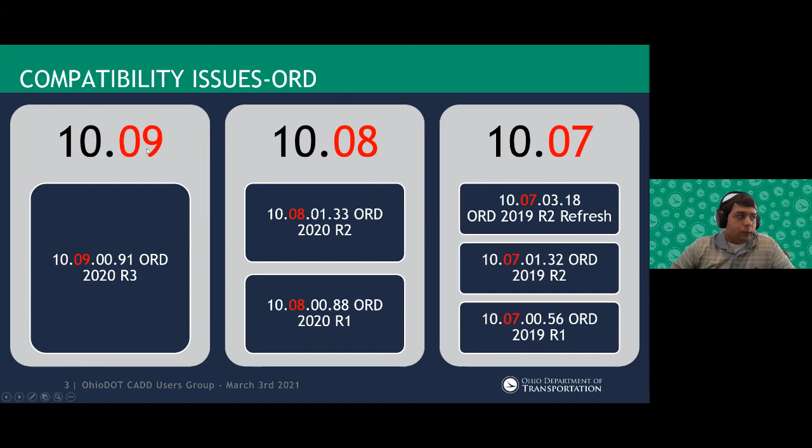I kind of wish I would have used 10.9, 10.8 rather than the name, but a couple years ago, Bentley was pushing this name hard when I wrote this, and they said this would be the easiest way for everyone to understand things. But I think now we see that the version number is really what we care about the most. So there's a little reasoning why I didn't use the numbering.

So when you set a version control here, if we release anything in a newer version than that, you won't get that update. And that's what keeps it compatible with whatever you set there. So just keep an eye out for that. We have not released anything past 2019 release 1 yet. That's why you won't see one in there yet. But hopefully that is clear to everyone. If you guys have any questions, feel free to reach out.

Another thing I wanted to talk about as we're talking about compatibility issues is the tech preview that was added into 2020 release 3 of ORD. It's the downgrade civil model option. I know you guys can't click on these links, but when we send the PDF out, these are links to Bentley's OpenRoads wiki page. So they have videos on these, but I also have the next slide. I'm going to walk through the same thing these videos go over.

All right, so let me just play this video and we can see what the downgrade civil model can do. So I'm just in ORD, I'm in the latest update. I'm going to go back to the backstage and there's now a downgrade civil model option. So when you click that, you're going to get the tech preview thing. So fair warning, it is a technology preview. So you hit OK.

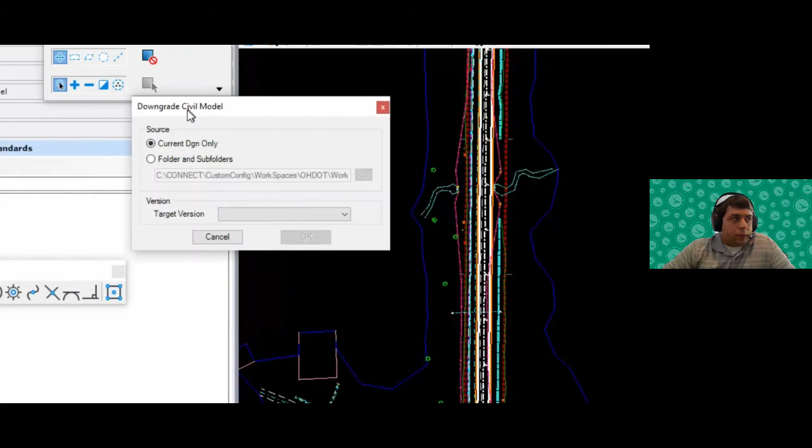And it will open up this little dialog. And you have two options. You can just downgrade your current DGN, or you can choose folder and subfolders. So you can downgrade a whole set of files within a folder you select. So first I'll just do the current file.

So you just pick what target you want to downgrade to. So, maybe I want to go back to 2020 release 2. So I'll hit OK. And then it will say, okay, where do you want to put this file that we're downgrading, right? So I will just choose the location. I believe I choose the scratch folder, or the 999 scratch folder. So I'm just making a new folder here, calling it downgrade.

And then I will go into here, hit open, and then I will get a little processing form here, and it'll go through and kind of tell you that it downgraded the file. So there, and downgraded, and then what I'm going to do now is just show you that it actually worked. So if I close this and I go and try to open that file I just downgraded,

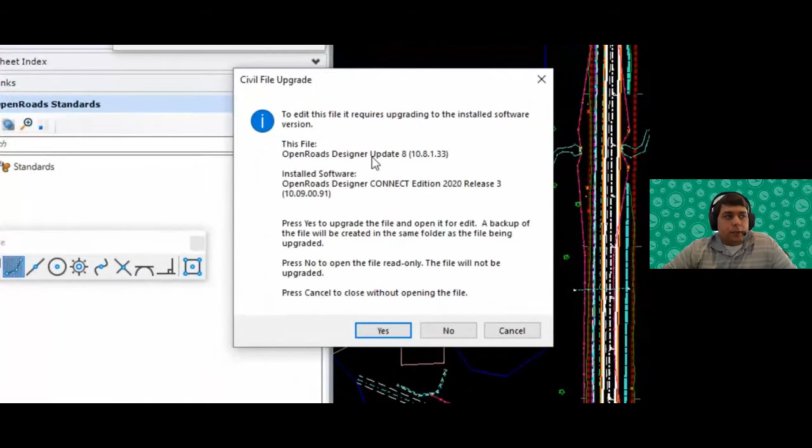we will see that I will get prompted to upgrade to the newest release. So that's basically telling you that that file got downgraded to update 8. So if you open it, it will upgrade it to the latest one, the one that you have installed.

So another thing I want to show here is the remove civil model option. So what this will do will actually just remove the civil schema completely from the file. So I'm going to select a folder this time. So I'll go to engineering, I'll just pick a sheets folder, but it's going to work on any file. It basically just strips the civil model completely from the file, so that you can open it with any MicroStation product, really. So I'm going to throw that into a different folder there.

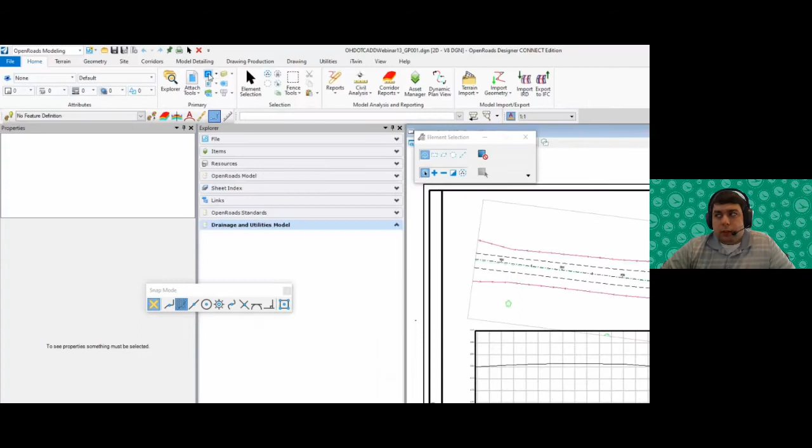I'll let it go through. There's 2 files there. All right, so it's done. So now I do want to show you when you remove the civil model, one of the things that it does do specifically for your profiles. So if I go and open that plan and profile sheet, take a look at the drawing model for my profile, you'll see that it has flattened it to just graphics.

That's because that ability to see that profile, you need a civil schema, right? You need the ORD to see that. So you notice it's a cell. So I'm just going to come here and drop that cell, and then I'll drop this line again here, and you'll see that I can select it, and all the vertexes will show up there.

So that's one of the things that it does do. It only does that for profiles. Cross sections, it's still a reference since it's just a slice of your 3D model. So didn't really need the civil side.

So another thing you can do is you can actually open Civil File Manager and perform pretty much the same thing. This used to be called Version Checker. So with this release, they changed the name of it to Civil File Manager. And so in here, I can open up file, folder, subfolders, so pretty similar to the other way. So let me just select a file here.

I did notice that right now in this tech preview, this is not integrated with ProjectWise. If you notice, it did not give me the ability to select a ProjectWise location there. I'm assuming that will be an update that will come out. So I'm just going to pick a folder here.

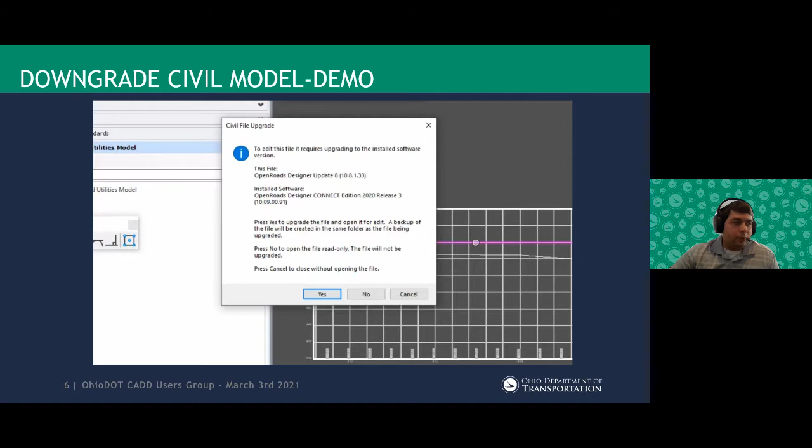Okay, let's see here. Someone asked about a list of defects. We do have a bunch of defects. I guess we can talk about letting the bigger ones be known. Some of them are enhancements, some are defects, some they're working on. We are working with Bentley, and they're working on a lot of stuff. So we can take a look at our list and see what we can put out there.

Okay, so a lot of good questions. I like this. I feel like if we were live in person, most of you might not have asked those questions, right? So there are some benefits to doing this virtually.

All right, moving on. Hopefully the downgrade civil model, which I think is a pretty cool feature, might solve some issues you might be running into when working with subs. But honestly, when you start a project, you really need to get everyone on the same page, the same version, so you don't run into those kinds of problems.

The next topic, which has been a very frustrating problem for me, and maybe you've run into it, is the refresh item master problem. I believe this started back in May. If anyone knows what I'm talking about, they've probably seen this frustrating dialogue. Honestly, I don't know what happened. The refresh item master has been there since 2015.

That button has worked since 2015, and all of a sudden it's asking externals for credentials, when you can go to the same location it points to on the SharePoint file and download it no problem. Either some Windows update, some Office update, maybe some update on our end on the SharePoint side, but our IT has sworn to me they did not change anything in permissions. So I couldn't get to the bottom of what caused it, because it actually is working. If you're inside ODOT, we don't get this message. This affects the GenSum file and our item master Excel add-in.

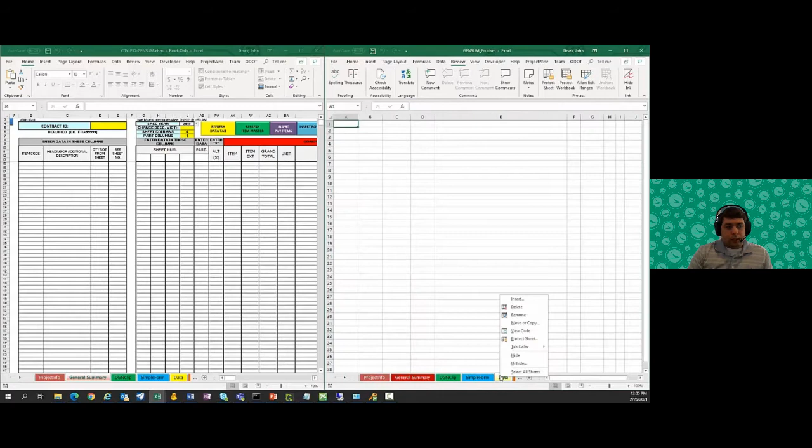I'm going to right click. I'm going to say unhide. And I want to unhide the query item 2 sheet. Okay, so that's actually the copy of the item master that gets updated, if you guys are wondering. I'm going to unprotect it. So go up to the top, review, unprotect the sheet. There's no password, it's just protected. Okay, so that's what we want to update.

So now we're going to go over to our GenSum file that's updated from the FTP site. I'm going to do the same thing. I'm going to come over, right click, unhide, unhide the query item 2. So in here, all I'm going to do is I'm going to select all of the lines. So I'll just select A2, hold down the shift key, hit over to get to the G column, and then hold down shift and control key and hit down, and that will select all of the rows.

I will then copy it, and I'll come over to the file I want to update, click in cell A2, and I will paste. Okay. So after you paste it, you should then have the update. If I go down to the bottom, so just hit control down, takes me to the last row, control down on the other side there. I'm at both of them at the same time. Most likely got all the updates then, right?

I'll protect that sheet again. If you don't, it's not a big deal. I'll hide that sheet so we don't see it. And now your GenSum file will be updated. Okay, so we'll hit save. And so that is the manual process. I know that's not ideal. I get that, but

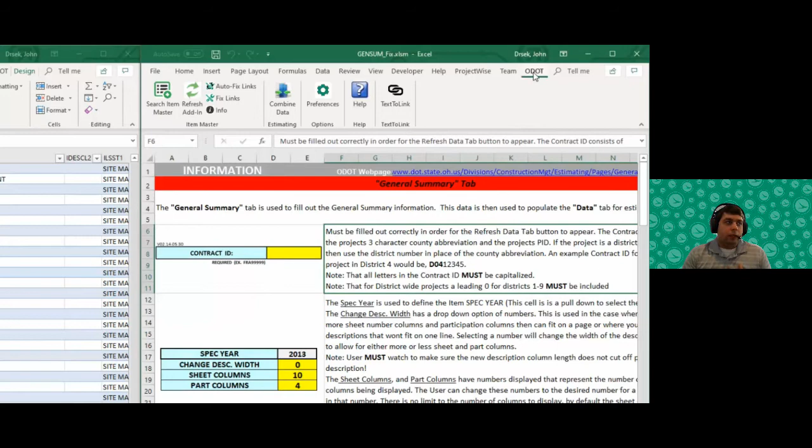So the add-in file, if you have the ODOT tab at the top, that's the add-in. So you're most likely at the same problem. It won't let you refresh the add-in. So this is just a file that you're actually just configured to inside of Excel. So all we have to do is just replace this file.

So if you're wondering where that file is, if you go to the backstage and hit options and then the add-ins section or tab, at the bottom you see the active application add-ins. There's the item master add-in, and it's going to tell you the location of that file, right? So this one is on my X drive here. So wherever that is, that's where you need to replace the add-in so that it gets updated.

So most of the time it should be inside your standards. So if you guys are on the network, then you probably all are configured to the same add-in, but you just literally come here and download that file and replace it. So that is the manual method for updating the item master in the add-in as well as the general summary sheet. So this video will probably be useful if you guys run into that. I know many of you already have ran into it.

Again, I can't figure out what happened. So the solution, this is going to be an active virtual meeting, right, or event. So I am going to post this link in here to this form, and I want everyone to fill out the form, and I'm going to walk you guys through it, and we can just see if our solution is fixed.

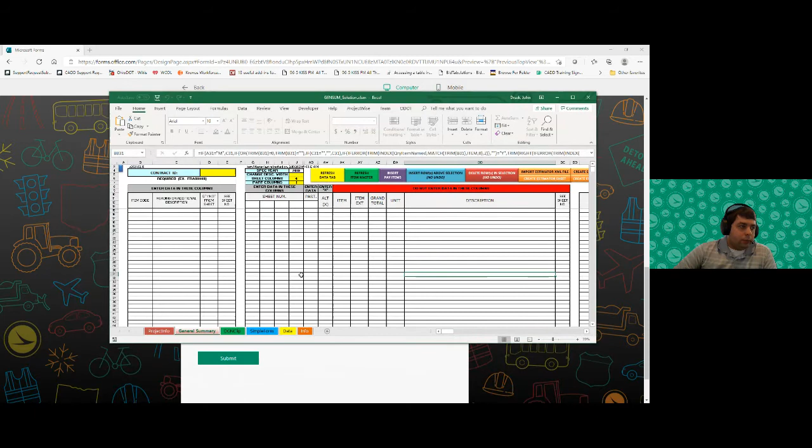All right, so it's opened up for me. I'll bring it over here. I'm in the solution file now. I come to my general summary tab, hit this green refresh item master, and then hit yes. And let this one update. And I got successfully updated. So I hit OK. So I knew that was going to work for me.

So externals, hopefully you guys are doing this right now. So I'm going to submit this. And it says, thanks, submitted. So let me pull up the results here and see what we're looking at. I'll give you guys some time to actually fill it out here.

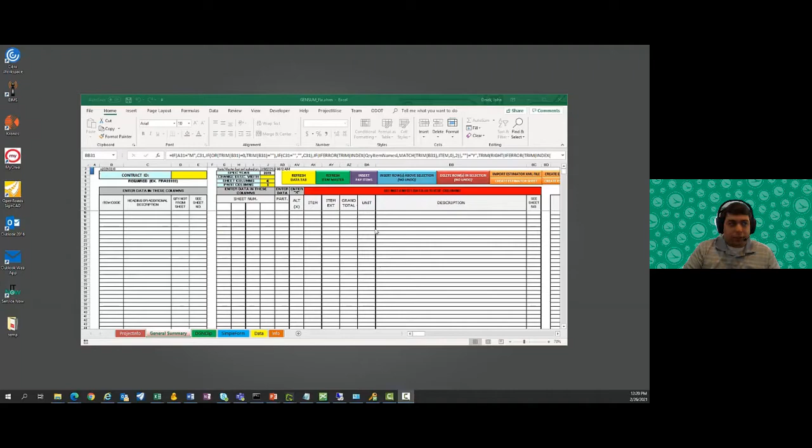Okay, try it again. All right, so I'm in this GenSum file, and I really wanted to clear up how the linking is working. So in the GenSum file, as you just saw, there's a copy of the item master inside this file. So it doesn't link outside, doesn't get the item master from SharePoint or from the add-in. It's directly in here, and that's why there's a refresh button in here. You're refreshing that copy of the item master.

And technically, there's two copies because I support two different spec years. So you see that spec year drop down. It says 2019 right now. When you choose the different spec year, the links are all switched to use that item master for that specific spec year. Okay, so I think that's pretty clear to everyone. It's all contained within this file, right?

Man, I talk too fast on my videos. So if we move on to talk about the item master add-in itself, so yeah, there, let me get the video caught up here.

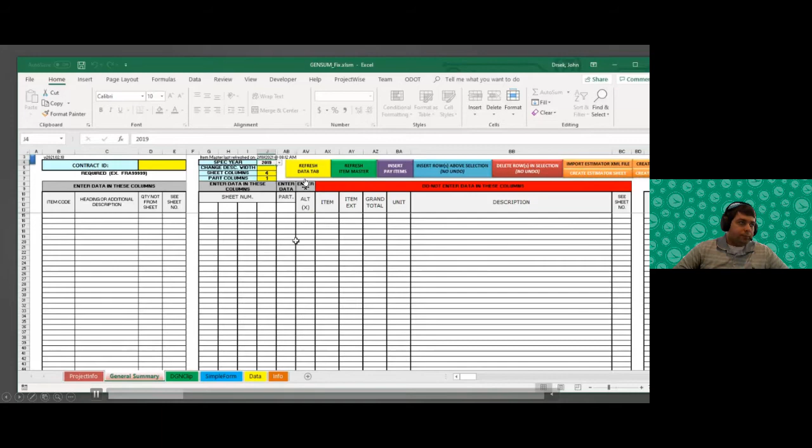So there's the drop down for the different spec years. So that means that technically there's two copies of the item master in this file, one for each spec year. Let me jump forward a little bit.

Okay, here we go. So the add-in itself, the thing you got to remember about the add-in is it gets loaded no matter what file is open. So it is a standalone thing. You see it when you open any file, but look, I have a blank file open. I still have that tab. So you got to keep that as a reminder that it is completely separate from all the other files you have open, right?

And so this add-in also has a copy of the item master in it as well. And the refresh add-in button inside the ribbon is actually updating the copy of the item master inside this add-in. So, which spec year you're using, that's in the preferences. So if I open up the preferences, you have the option to set it to 2016, 2019.

So keep in mind, this has nothing to do with what file you're in, right? This always gets loaded. It's an add-in. So when you hit that search item master, it's going to show you the item master for what spec year you've set to use in this add-in, right? So again, there's two different locations. We have a copy of the item master in the add-in. We have a copy of the item master in the general summary sheet, right?

So now let's take a look at the sub summary sheets that have all the formulas that pull the item master data like descriptions and stuff. You'll notice there is nowhere in this file a button to refresh the item master. That's because the sub summary sheets do not have a copy of the item master inside of them like the general summary sheet does. Why did I do that?

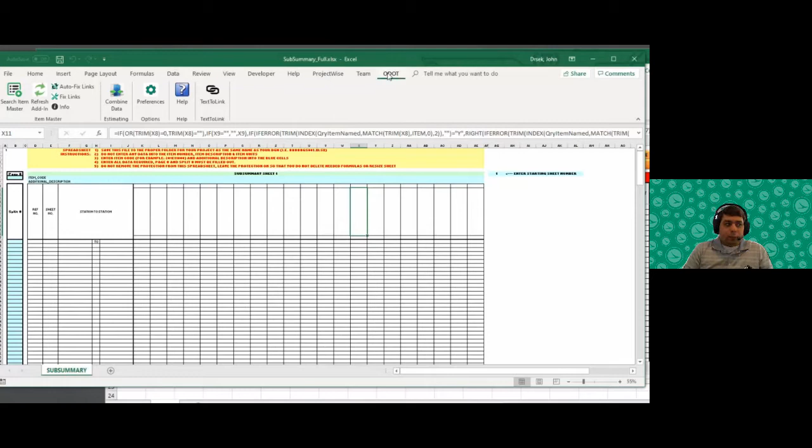It knows where the file is because you're running it from within the add-in file or from within the ribbon. So it's actually linked to the add-in. So you could also link a given spreadsheet to a specific spec year of that add-in. So if you have problems like with your items not showing up correctly, or maybe it says item doesn't exist, make sure the links are right. All you got to do is go up there and hit fix links and run it. It's very simple.

But that still has another problem. That link to the add-in, right? That add-in is getting updated over time. So if you go back to a sub-summary sheet that you maybe did 6 years ago, all the formulas that are linking to that add-in, the data might have changed over the years. So if you want to go back to an older file, you don't want those formulas and stuff to edit. You want it to stay the way it did when you submitted it, right? So linking to the add-in, you're always going to have that problem, right?

So many people don't know this, but I think a lot better way to go is instead of linking to your add-in, I give you the ability to link to a specific location. And that has been there since 2015. I just don't think people really use it. I did show it, but I didn't really showcase it, I guess. So what you can do here is you can literally just hit the little 3 dots here and go select an Excel file that has the item master in it. So a great file you could go to would be your general summary file for that project, right? So that's what I'm going to do.

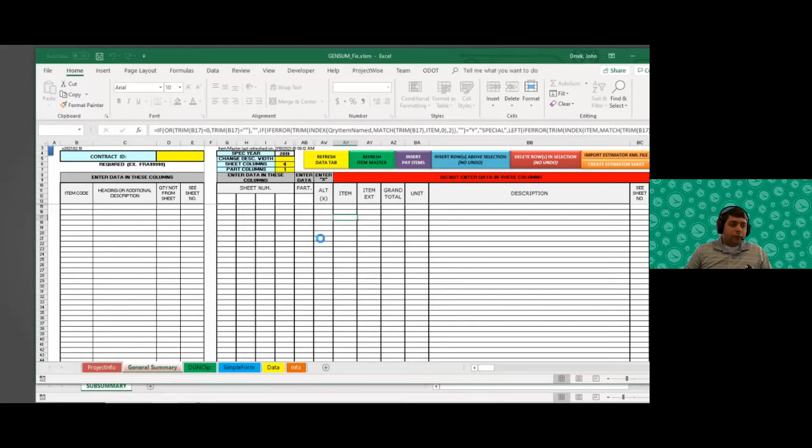I'm just going to hit the 3 little dots. I'm going to select my gen sum file. And I got an error message. That's because my gen sum file is open. You have to close it. So rather than remaking the video, I thought it'd be good to show that for that button to work. So let me do that again. I'll come in here and I will hit select location. I'll choose that gen sum file. It's going to read it.

It's going to say, okay, here are the sheets I've found inside this file that you can link to. So there's query item and query item 2. So query item is the previous spec year. Query item 2 is the current one. So when you go to the gen sum file that I showed earlier, that drop down for what spec year you want to use, the newer one is query item 2. I did that just to make updating when we go to the next spec year easier on my end.

So all you got to do is hit that, hit OK, and then you can add in your files that you want to fix your links, so most likely all the sub-summary sheets on your given project, and then hit fix links, and now all those sub-summary sheets will be linked to your general summary sheet. So whenever you update your general summary sheets, these would be using that, and that is a way you can keep the formulas from updating to the latest item master, but stick with your actual copy in your general summary sheet. So that way you can come back to the files in 6 years and you don't have to worry about the formulas showing different data as our item master is updated over time.

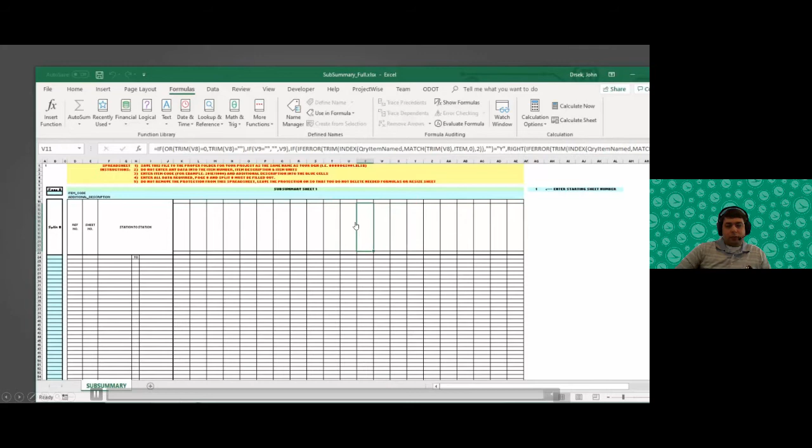So you don't have to really care about that too much. If you just use the fix links button, that'll solve most people's problems, I think. All right, so it looks like I'm about 2 minutes over on this topic, but while we're talking about the item master, I thought it would be a good time to also hopefully clarify that.

Anyone who's used the automation side of the subsummary sheet really says how much time it saves. So if you guys aren't using it, there's tons of videos out there on it, and we might do a webinar on it in the future to get people who haven't seen it or don't know how to use it started with it.

Okay, so let's see. Looks like there's no questions, which means I did an excellent job of explaining things, right?

Hopefully. So now the next topic here is placing headwalls. I don't think I'm going to take the full half hour on this, but this has been an area where we're a little lacking in our standards. We don't really have many feature definitions out there for headwalls, mainly because every individual size requires a different feature definition at this time.

If you take a look at headwalls, there are thousands of possibilities of different sizes, so for us to go through and make those would be very time consuming and probably not worth it. What we have been waiting on is for the feature definitions to be able to handle parametric cells. We're still waiting on that, but I'm done waiting. We have to provide something.

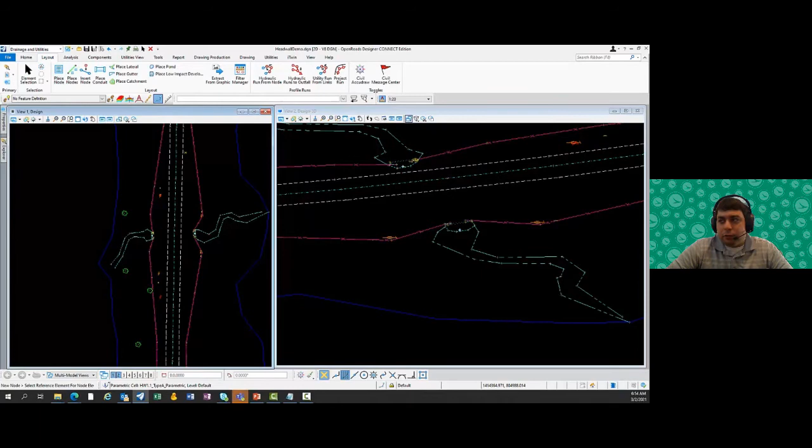All right, here we go. So we're going to the layout tab and we're going to place nodes. So again, this placing head walls isn't so much about placing nodes. I mean, I've shown that multiple times. Hopefully everyone knows how to do that, but I'll just show you the workflow here.

I'm already on the generic head wall feature definition. So that's the one you're going to want to use. There's one for proposed and existing. It puts it on a generic head wall level that you can turn off because you're most likely not going to want to see these graphics in the long run.

So I'm going to come down. I'm actually going to use the survey point, but you don't have to. So I'm keying in elevation. The rotation doesn't matter. You see there's a little X. Now, again, you're going to place this wherever you want to place it, but there's the 3D X. So it looks like a jack from like game jacks. It makes it a lot easier to snap to that center than the triangle that was there before.

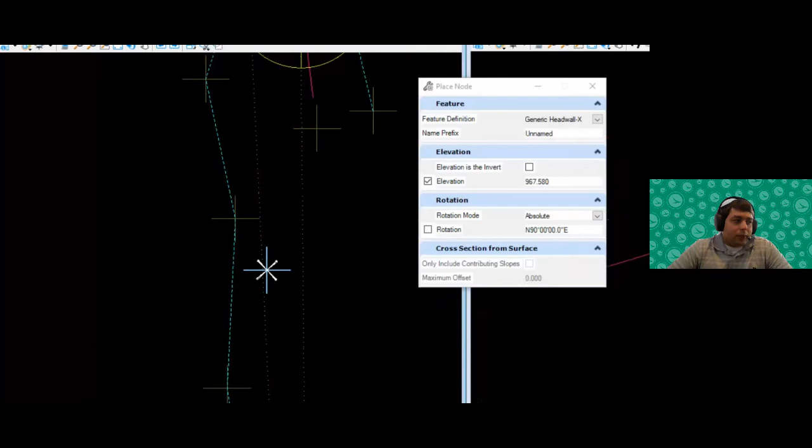Again, they're on just I think a generic head wall level, so you can turn it off to get out of your way. So I'm going to place the other side, so I'm keying in the elevation. So again, this is going to be the location that you want that head wall invert at, right? So again, if it's proposed, you might not put it right where they surveyed that point, but I'm using it just for demonstration.

Okay, so again, now you can put in a pipe. So I'm putting in a pipe. Again, it's not really what the video is about, but you need to put the nodes in to draw the pipe, right? So granted, that's a small culvert pipe. It's probably not even the right type, but it's just for demonstration.

So now, what we really want to show here is you got to go to the 3D model because this is a 3D cell that we're placing. So you do have to place it in 3D, which is where a little bit of the complication comes in because you got to know a little bit how to draw in 3D. It's not bad. So I am starting to place active cell.

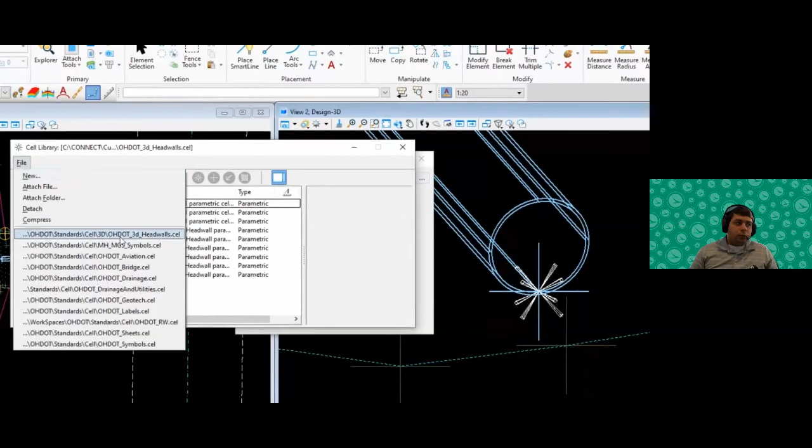So if I go and I choose the OHDOT 3D headwall cell library, in here I'm going to see all those parametric cells that I made. So I made them for headwall 1.1, type A, type B with a left angle, type B with a right angle, the half height 2.1, 2.2, and then the box culverts type A, B, and C are in there as well. So again, that's just a starting point. They're parametric cells, so you can change the variables to any custom size that you want. That's the reason why I'm showing you this, because it's kind of a workaround.

So I'm going to place the headwall 1.1 type A, and you'll notice there are variables and also variations. So on the second line, that drop down actually has variations. So that will match the standard construction drawing. So when you select a given variation, it's going to set all the variables down low to those values that you'll find in our standard construction drawings. You can very well just come in here and type in your own dimensions that you want here.

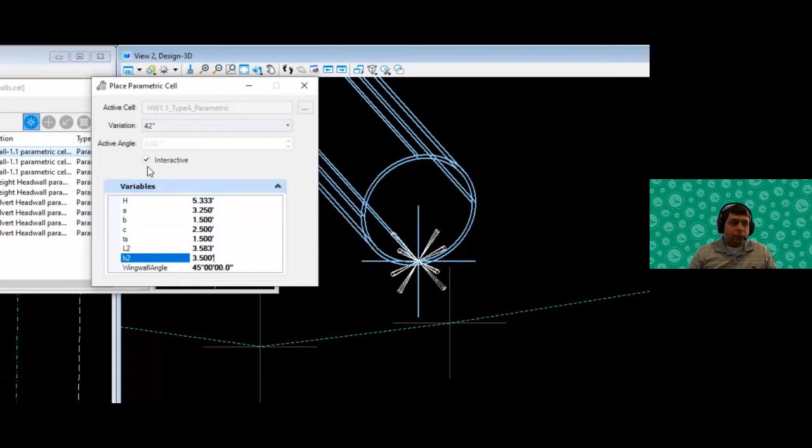Okay, so H, A, B, if you're wondering what those represent, take a look at the standard construction drawing. A and B are the footings, C is the distance to the center of the headwall parts, like half the distance of the main length. H is obviously the height, H2 is the height of the wing wall. I won't go over all of them. TS is thickness, I guess I just did. So, all right, so we're gonna place it.

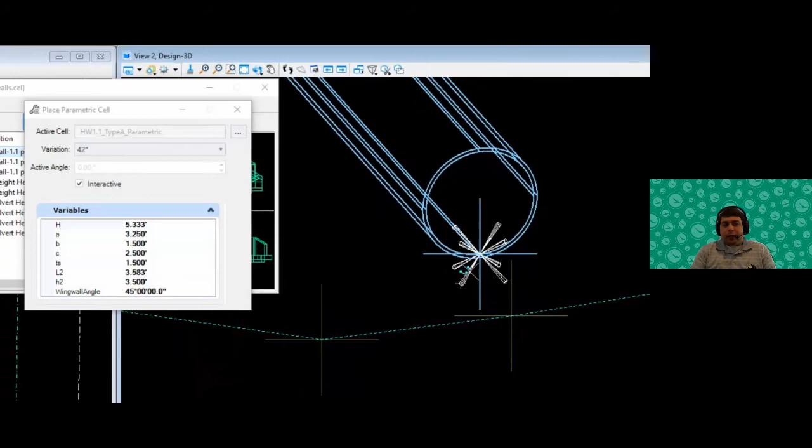So right now, when I see that, it wasn't looking right. That's because I need to turn on AccuDraw, and I need to make sure that I set my AccuDraw orientation. So I hit T for top in AccuDraw to set my 3D AccuDraw compass to be in the top plane. And then that rotates it so that it's in the top view, which is what you want. And now you're just going to click and make sure you check on interactive in the dialog so you can choose your rotation. If you don't check on interactive, it won't let you rotate it.

And the way I drew all of these is so that you could go to the other side and snap to get the rotation. So I drew it purposely so you don't have to worry about keying in an angle.

If you have a culvert alignment line or something, or just the two ends, you can easily just go click on the other side, and that'll do the rotation to match that skew of the pipe, whatever it might be. Okay. So let's take a look at another one.

So if I go to like the box culvert head wall here, you see there's more variables. That's just the way the standard construction drawing... well, I guess technically it's their data sheet. It's not really a standard construction drawing, but if you guys do this, you know what I'm talking about. So I put in a lot of variations. I was not about to put in a variation for every box span and thickness, so that's why I put the little hashtags. Just remember to fill that out. The rest really was just the heights and the skews.

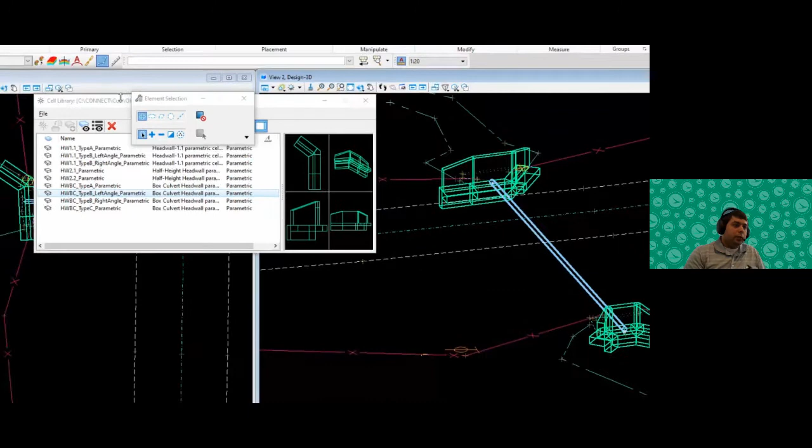So since this is a left angle type B, I'm going to do the same thing. I'm going to come over. I'm just going to place it. Again, make sure your civil AccuDraw is on and you're in the top rotation there so you get it placed correctly. And the rotation, same way, come across to the other side, click, you get your rotation. All right. So looking at top view, it looks like the rotation came in right. That's what I like to see.

And take a look at another one. So the half height are a lot simpler. They're just basically a block. But we did put in all the variations. So I had Tess do that. So thank you, Tess. We put in all those different variations. I know there was a lot of them. I won't place that one.

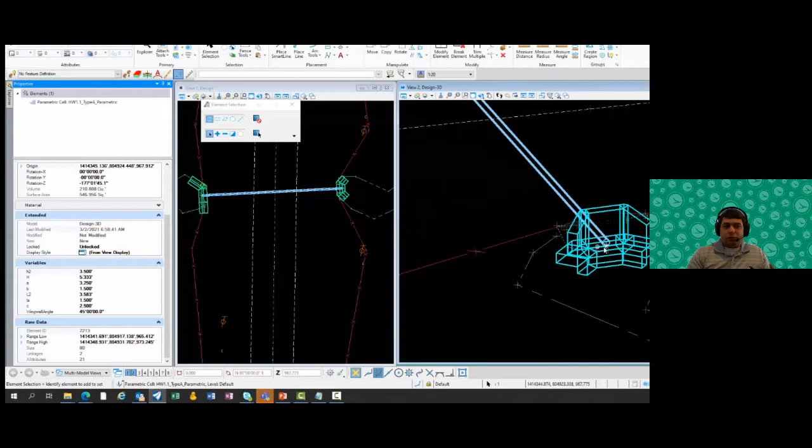So let's talk a little bit more about these parametric cells here. So if I click on this parametric cell and I take a look at the properties, what you're going to see is there's a whole section for variables, right? So they're all listed. So you can easily come in after you place it and change the dimensions here, and your cell will automatically update. So let's take a look at this. One thing I want to mention is that I did take a lot of time to get the resizing to work appropriately. I think I might be getting ahead of myself.

So one thing I want to make sure I don't skip. I do want to mention one thing that I've seen. So your audio will better match up with the video, but I have noticed that sometimes on that initial placement of the cell, it places it to the left or to the right a little bit. So do give that a check. You notice it doesn't do it to me every time. I think it does it whenever I compress the file and try to get rid of unused headers, is what I think I've narrowed it down to.

So you guys hopefully won't see this, but if you do, it's not hard to fix. Just come here and do like a midpoint snap on your head wall. And if the midpoint snap lines up with where your node is, then it placed it correctly. If it's not, then it will be over here to the side a little bit. All you have to do is select your cell and do a move command and just move it in place, and then everything works fine.

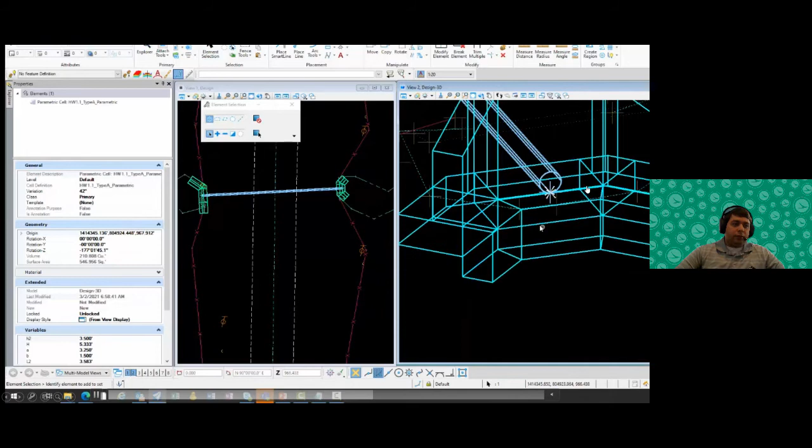I'm just making you aware because it has happened to me, but it seems like it's probably after you do your compress or something, because as you notice right here, it worked just fine for me. So I don't want to make people think it's so complicated or it doesn't work. I'm just trying to be full disclosure of everything I ran into. But anyways, let's change the size here. So that's just a little side note. Just check that it actually placed it, and you'll pretty quickly know if it's a little off. But again, just move it. It's not the end of the world.

So what you'll notice is that when you change the value, like I just changed this from I think 2 to 4, I have set these parametric cells up to make sure that it resizes correctly. So the origin, the midpoint stays the same here, and it moved out the two ends. Same thing with the height. If I change the height, it's going to move it up. If I change anything with the footings, it's going to move it down. That invert location is going to stay put. So I made sure I rigorously tested that. So if you guys aren't getting that, let me know.

But I took a long time, a lot of remakes, to get the parametric cell to resize the way we want it to. So I really like the way these turned out. So this is going to be a lot easier than making like 1,000 feature definitions. It's a little bit of a workaround because you've got to place it in 3D. So hopefully that will go away.

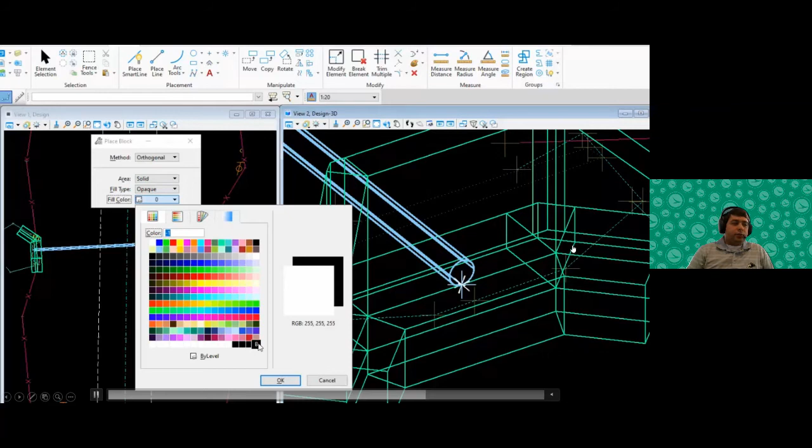So what I'm about to do is I'm about to place a block, and I'm just going to place it and draw it on the face of this culvert. So again, I'm going to have to use Civil AccuDraw. So I'll just make it red. Yeah. So I'm making it red just so you guys can see it, but obviously it might be black with a different display. It might look better.

So I'm going to come here. I'm going to place a block. I'm going to use AccuDraw. So I'm going to come in here. I'm going to hit F11 to give AccuDraw focus. I'm going to hit the O key, and then the A key to set the origin. And now I'm talking too slow. So what I did is, I did a midpoint snap, and I set my origin to that midpoint, and that was just using the O key and then the A key for AccuDraw.

And then what I did was I set my AccuDraw compass to be in the plane of the face of this head wall. And the way you do that is just R and E for rotate to element, right? So RE, AccuDraw shortcut, rotates to element, and then I'm going to kind of move my cursor over into this face, and you'll notice that the compass here rotated to be there. And so I'll click, and that sets my rotation.

So now I will key in, like maybe it's a 4 foot, so I'll key in 2 to move my starting point over 2 feet, right? So now I got that starting point. So now I'll come over 4 feet, and then that's kind of like your opening. So you start at the midpoint, go half the distance. So there's just some Civil AccuDraw shortcuts. So you don't need to do scratch lines if you know how to use AccuDraw.

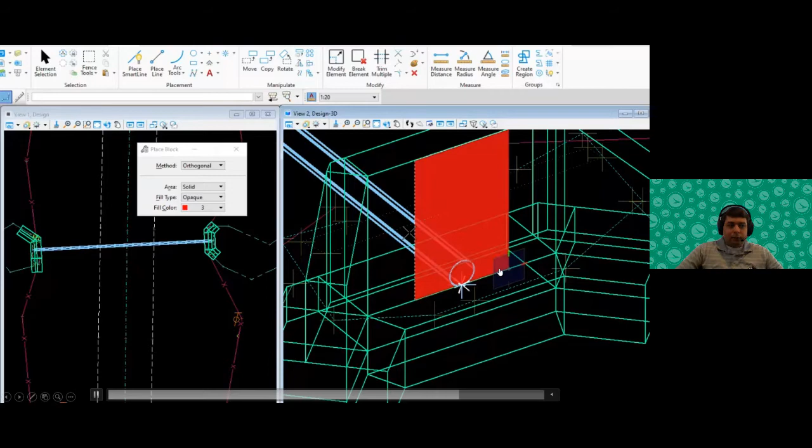So I'll key in a height here, and there I'll enter that in. So really that's just for more viewing purposes. Just if you want to see that opening, what it would look like. You could do the same thing for a circle or elliptical. I drew a box because I thought that would show AccuDraw better since you started at the midpoint. But you could do that with all the different shapes, really.

So there I changed my view to kind of see more of a material-based view. I think I did smooth modeling to see that. So, one thing I do want to caution you is that this cell, the downfall of this whole workflow is the cell has nothing to do with the feature definition, nothing to do. It doesn't have hydraulic properties on it or anything like that.

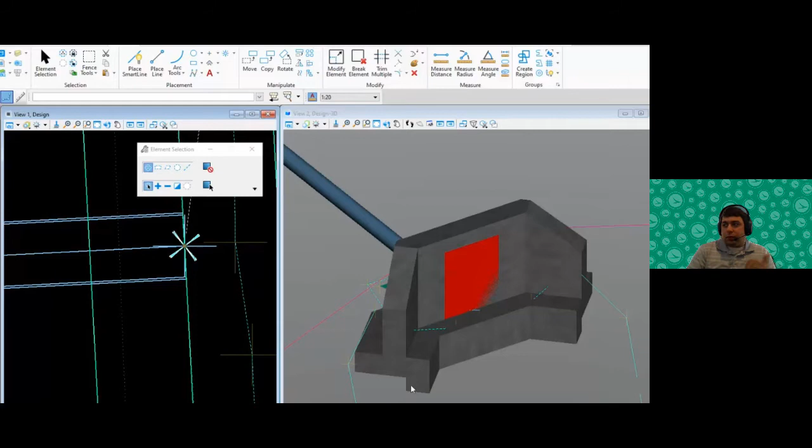So if you end up changing the invert of your node, so you go back to your node feature definition, you change the invert, you have to remember to come back here and move that cell because it doesn't know to move with it. It's not a part of it. So that's the downfall to this workflow. But the benefit is that you can easily change the size all you want with the variables. So eventually when feature definitions support parametric cells, then we won't have to worry about that. But for right now, that's what we have to worry about.

Oh, another thing I forgot to mention is when you place these cells, don't forget to set your active level. You notice that when I placed it, it came in on the head wall color there.

But if you look at my active symbology, the level was default, and I still had ByLevel. So the weird thing is that these parametric cells, all the sub elements, all the pieces of this cell, get placed on the head wall level and the symbology. So that's why the color is showing up. But then the overall cell places on your active symbology.

So I feel like it probably should either act like a point cell or a graphic cell. So I'm going to send a ticket to Bentley on that to get some clarification on why is it treating it like a graphic, but then still using your active symbology for the level. So just a side note there, just set your level to the head wall level, so you can control the display of that if you wish.

But I think other than that, that is all I had. We did have a question come in, JD. All right. For head walls, sometimes the cutoff wall is needed. When this happens, the head wall needs bumped out by 6 inches. Is this an option with the cell?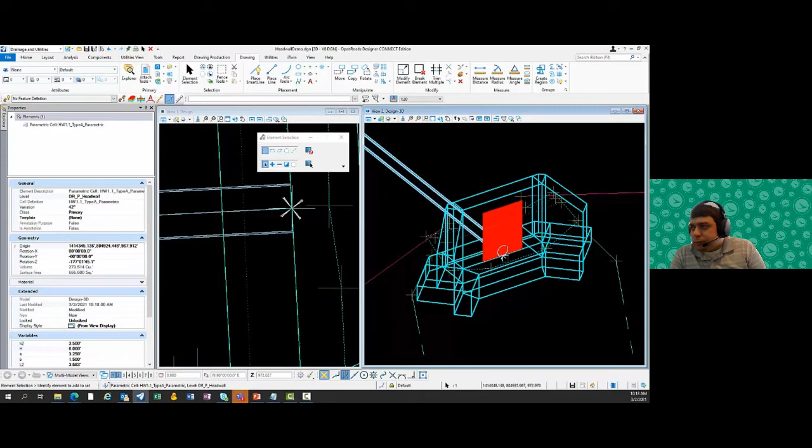I guess when you say bumped out, you're meaning like you could just move the location of the cell, like the whole thing, if that's what you mean. That origin point is what stays put. So if you bump it out 6 inches, then everything moves with it. If I didn't answer your question, shoot me an email, and I can make sure I understood that correctly.

Will the parametric head walls show in the profiles and cross sections? So in terms of cross sections, it's a 3D slice. So if your cross section is slicing through that, then it's going to show whatever it crosses. So it'll show the actual shapes that it crosses. In terms of profile, you can do a 3D cut to show it. It won't by default show on the profile. If you do like a profile run, that's not gonna work either. Let me make sure I answer that right.

I feel like I showed this in a webinar, doing the profile. If I remember right, in my webinar I showed doing a 3D cut to get the head wall to show up, and in that one I was using an actual node, and it had the cutout of where the pipe comes through, so the opening, which we normally need on the profile for a culvert detail sheet, because that's really what the video was showing, how to make a culvert detail sheet, and you're using the profile to do that. You could just draw on the profile the extra stuff you needed, like riprap, or if you didn't like that it wasn't showing where the opening was, you could just draw those lines in.

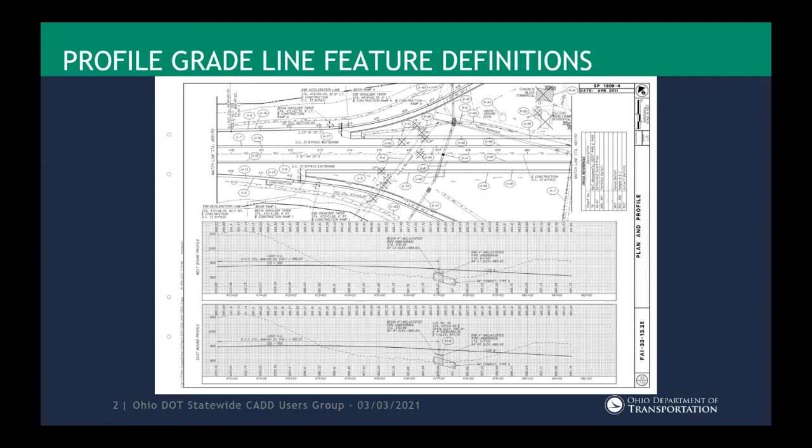You probably ended up creating a plan profile sheet like this sample plan, or maybe you had a separate plan sheet and then showed the left profile and the right profile together on a separate sheet. The latter is probably what I'd say is more common, or at least what I'd seen the most. So next we're going to talk about some of the changes and additions to hopefully make these workflows a little bit easier.

So as I already stated, there were a couple of needs here that arose, and one was a way to accommodate a divided highway project with split or offset profile grade lines using a common center line. And also we received several requests about how to show the existing ground line at twin structures where they wanted to see the existing ground at the profile grade lines for each structure, and then annotate those strip grade elevations accordingly.

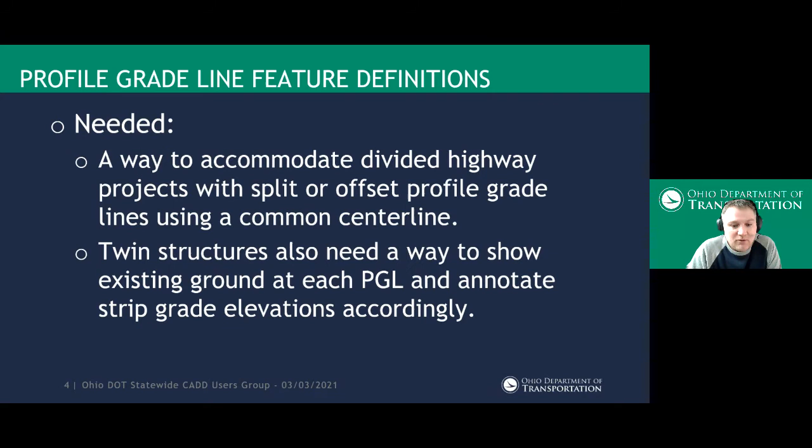So in ORD, it needs to keep the vertical geometry in the same DGN as the horizontal geometry. So this creates a problem if you want or need to have two profile grade lines. We can't create another DGN file referencing the horizontal alignment and create a proposed profile as a reference file. So the previous DGN libraries only had one feature definition to choose from for proposed profiles. So then the question came up, what do you do if you want to show two?

So the first option that came to my mind was create a copy of the horizontal geometry file, and actually have two files, one for each profile grade line. Obviously that would create duplicate horizontal geometry and would cause numerous issues. For example, if the horizontal alignment changes, you need to make that change in two places and make sure it is correct in both places.

Potential modeling problems. I haven't really tried it, but I anticipate that if you had two of the exact same alignments referenced in with the same name, you're probably going to get some sort of modeling issue, where it's not looking at the right alignment, for example. And there's probably a handful of other reasons why this is not a good idea, and we're not going to recommend a workflow like this.

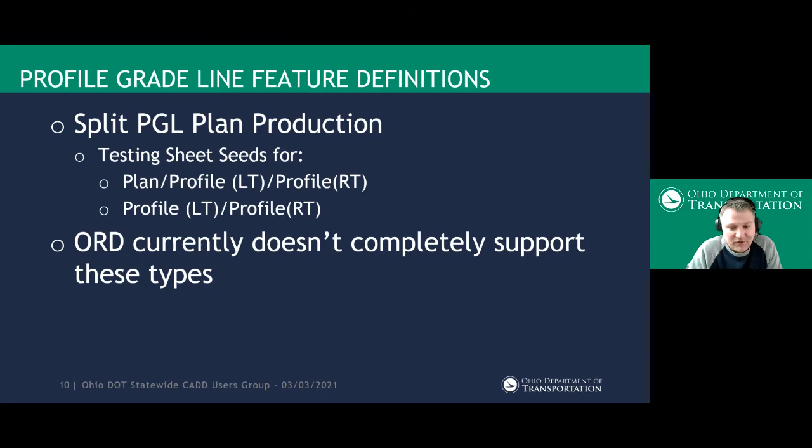So all that said, for the time being, we're still going to recommend using the separate profile sheets. So you just do all your left profiles on one set of sheets. You can use the separate profile sheets, or you can do it on your plan and profile sheets. Then you would have separate ones for the left and right. So if you need to do that now, that's kind of where we're going with this, but you can still use the feature definitions that we're talking about today.

If you already had files created prior to that January update and you've been using those, you will need to update the standards from the DGN library. So within the Explorer, you just navigate to the DGN file that you have open, right click on that, and say update from DGN library or DGN lib. This will ensure you have all the correct feature definitions and basically make them in sync with the OHDOT delivered DGN libraries. You will want to do this in the BK files that you have. So if you have more than one, you need to do that in each BK file.

And you also need to do this in the existing terrain model. I mentioned the terrain model earlier and the strip grade elevations not coming in on the right level. Those strip grades from the terrain model are controlled, or that feature definition is in that terrain model DGN. So it is important to make sure you go in and do the same thing in your terrain model file.

As a side note, if you're not the CADD administrator for your company, you will need to make sure you have the most recent workspace in your environment, however you guys handle that. I'm assuming most everyone will keep up to date. I know we've talked to some folks who don't like to upgrade right away or don't like to get the current standard right away. So you will need to at least have the January update.

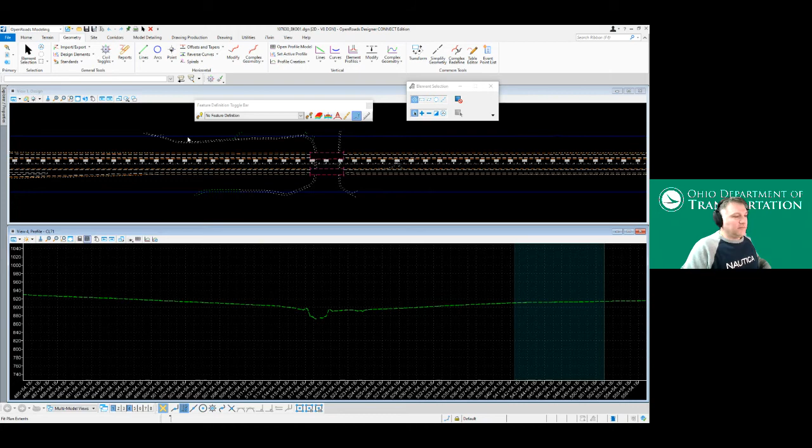Okay, so I have a divided highway. This happens to be Interstate 71. I rotated the view here so that it was easier to see on the screen rather than running north and south. It was an 84-foot median, so a PGL on each side at 42 feet. I already have my terrain model attached and set active, so I'm seeing my existing ground along my center line. So there's one way to do this.

If your profile grade line is the same and we don't really need to show two, you don't really need to use these new feature definitions. You could stick with the geometry feature definition and be just fine. The thing here is you probably need to make sure you show your existing ground at the offset of your profile grade line rather than at the center line.

I did look through some example plans that I'd worked on in the past. We had a brand new highway project, and it didn't really matter where the existing ground line was shown, and we had just shown it along the center line. But generally on reconstruction or widening projects, you're going to show that at the correct offset.

So one way you can accomplish that is just select the existing ground, and we can look in the properties here, and we could simply change the horizontal offset to be whatever our profile grade line offset was.

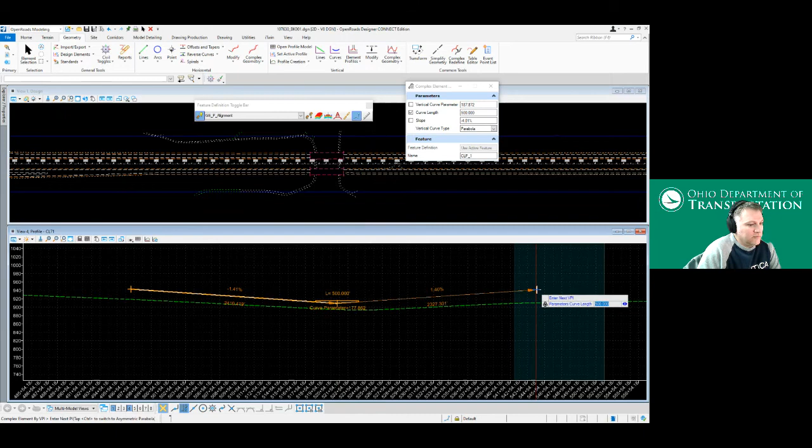And then when you look at the alignments, again, if you only had one, we could just use the GEP alignment feature definition and we could create our proposed geometry that way. So this should look familiar. Obviously, you would tie into existing somewhere. So that would be how I'd say to do it on most of your projects where you don't have a divided highway, or don't have two profile grade elevations, or don't have an offset that you need to show both. So let me set this back to a 0 offset here.

Okay, so now I'm back to where I was. Now what happens if I want to see the profile grade line or existing ground along the left side and along the right side, because when I cut my plan sheets or my profile sheets, or my bridge guys want to see the strip grades along those existing lines, we'll need to do that differently. So we'll go to vertical command and we'll go to profile from surface. And this is where I was mentioning there is a bug here. So the vertical offset does need to have some value set into there.

And before I do that, on my feature definition toggle bar, I just wanted to point out you can also use it from the tool settings dialog. I'm going to go to the profiles folder under linear, and then I'm going to select the existing ground left feature definition. And it changes the name there for us. And I do want to set my start. I don't remember what I used. 500. This is just to make it a little bit faster for the demo. I don't want to do this entire alignment. It's pretty long.

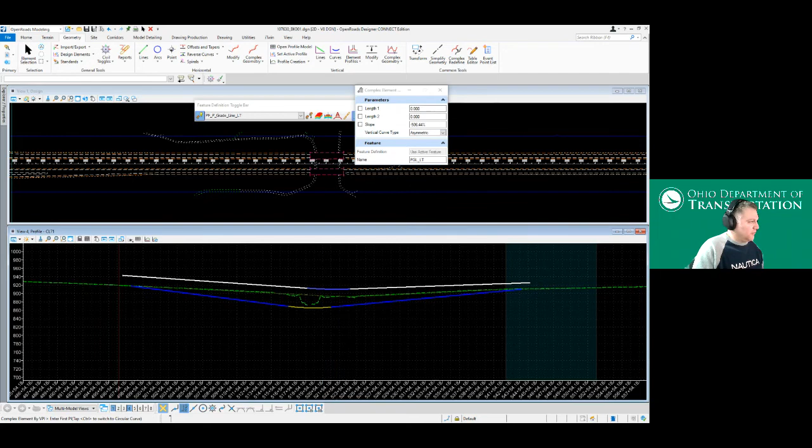If I look at my level display, you'll see that those levels existed. So when you are designing, you could turn off, for example, the ground line at the center line and the ground line on the right, and only show the PGL lines that you're wanting to work on, making sure you match existing and stuff there. So I'll do that for the right side. I'll turn everything off except the ground on the right, and I'll select my proposed grade line right here. And I'll just do the same thing.

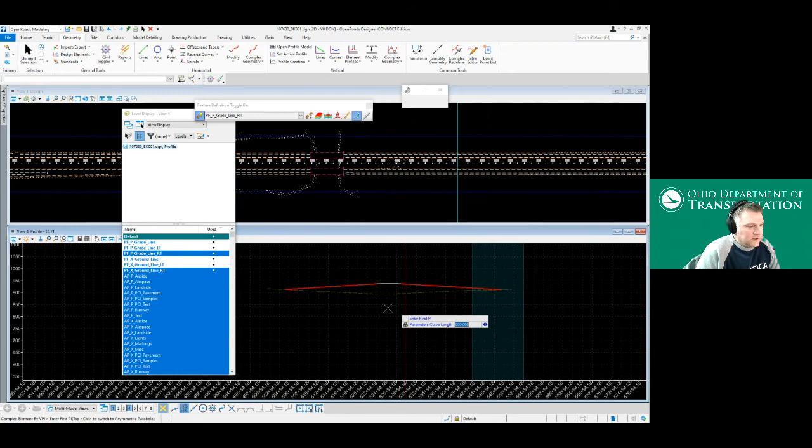So now if I turn on all my levels again, you'll see I have the ground left and right. I have my PGLs for left and right, and I also have my center line ground line there. And again, you probably wouldn't need this one if that were the case that you were working on.

So you may have noticed I had a little fun with the colors. I was just trying to change things as I was working on these so it was easier to see. And there was no real intent there. I ended up selecting blue and kind of a gold color. And then for the next one, I thought I'll just do scarlet and gray to make all those Buckeye fans happy. I have no allegiance one way or the other, but I just thought some folks might like that. I wasn't intending for it to stay that way. It is. I forgot to go back and change it, so it may change in the future. So we'll see.

Okay, my headset turned off.

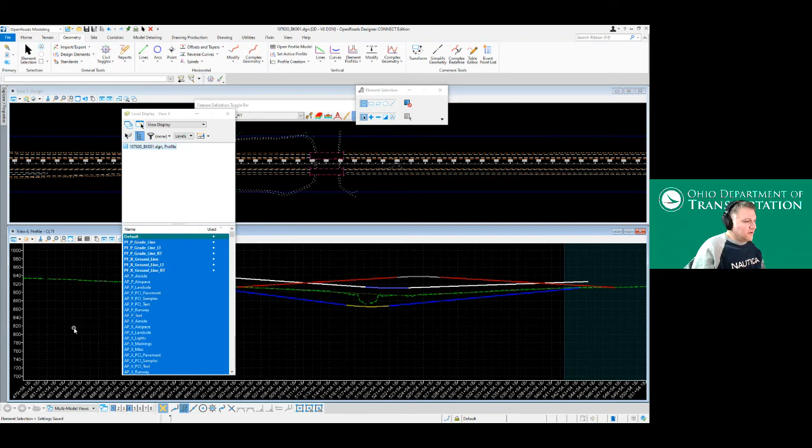Okay, so we'll see. We can turn levels on and off, and that's really all I'm going to show here. So I'll just save my settings in this case, and now we're ready to do some plan production, and switch over to another DGN file.

Okay, so here is a GP file. It's GP001 is all I created, and all I've attached to this for this demo is the BK file that I was just working in. And because it is the file I was working in, I'm going to refresh this or reload this. Then I should just be able to, let me try and reopen this real quick.

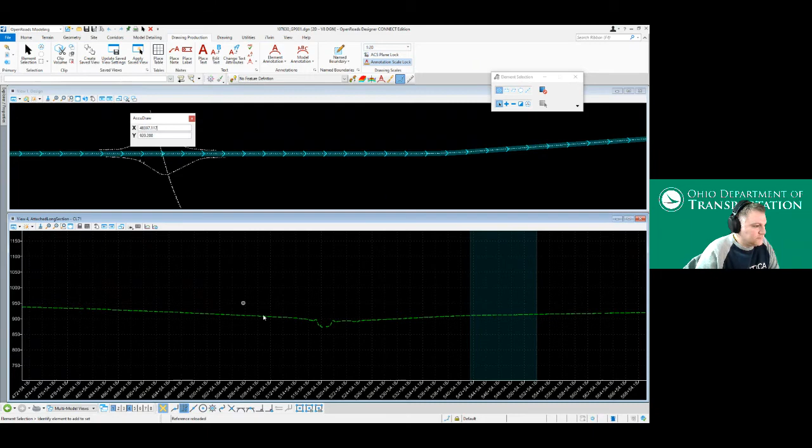Okay, because those levels were new, they weren't turned on, so we'll just turn those on, and you'll see everything that I just created in my BK file. For this example, I'll just focus on the left side, so I'll turn off everything except the left. And then again, I'll save my settings.

So here what I want to do is I'm going to go create a couple of named boundaries, and I'm just going to do the profile here. And it's actually just going to be the standard profile where we have the same sides stacked together, just to show you how the process is supposed to work. So I'll select my profile drawing seed, and then I'll set it to 50 scale. And my method is going to be by stations. If you had your plan together and you wanted to match, you'd obviously set that to from a plan group.

And then I think I just need to identify my profile view, and then pick my start location. So I'll just make it 500 where I started my profile. And then I'm just going to do a couple of sheets. Just do one. And then my vertical exaggeration for 50 scale is going to be 5. I have everything else just as the default, and I have on the create drawing, show dialog. So data point here a couple times. Finish that. So now I'm in the create drawing dialog.

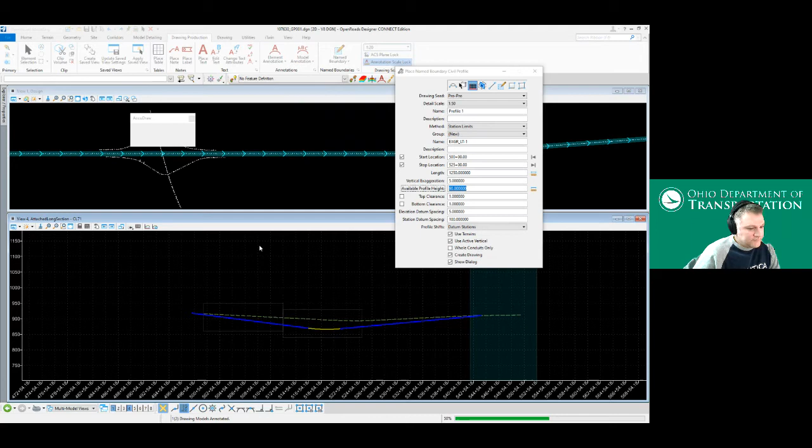So here you can see I have my profile sheet now, and I have my existing ground that was on my left and my profile grade line that was on the left side. And then those are annotated as well. And you can see here, like I was mentioning earlier, I didn't include the dimensions because that's handled with the sheet annotation a little differently.

So we could just manually draw in a dimension line, and I guess I would recommend that in the drawing model. You'll see some other profile annotations here, and you'll see other strip grade elevations here. I'll show that in the drawing model in a second. It's annotating everything that was in that BK file. So in the drawing models, there will be another step.

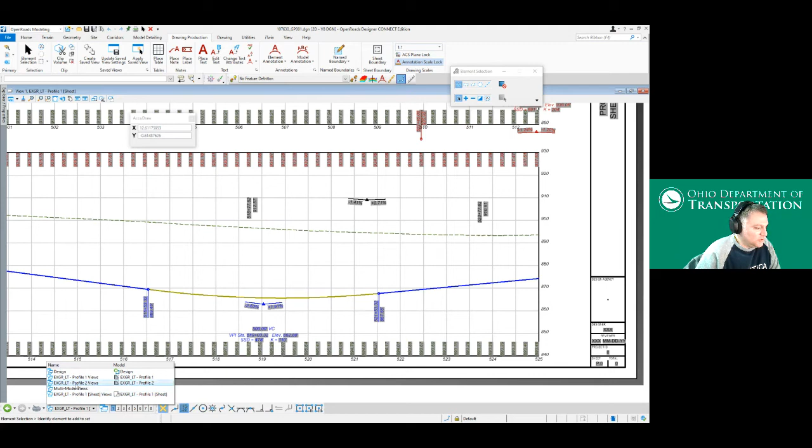So if I just switch to the profile 2, I figured this might happen. A little level display issue, which I'm sure we've all experienced. So I'll just turn on my left side here from my reference file so I can see my line work. Then if I switch back to my active model, you'll see that the way this was annotated, I made the text that's annotated the same color as the profile grade lines or the existing ground.

So if I look at, I have some red. This is where that vertical curve was on the right side. That was red. So I can turn off the proposed text for the PGL right. And then on the strip grades for the same thing, I have a proposed strip grade right. So those are red, so those get turned off. And now I just see the blue ones.

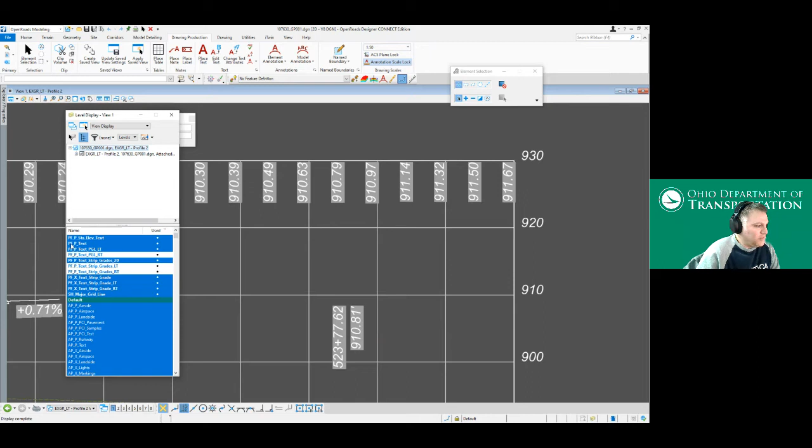I did also have another alignment back behind there. So if I turn off the proposed strip grades left, you'll see that the proposed alignment feature definition was also displayed there. So that's this PFP text. Oops, that's the wrong one. Oh, it's just strip grades 20.

Can't remember why the 20 was there. I think we did that so we could do 20 scale, had elevations every 25 feet; 50 scale would be every 50 feet. I think the intent was to change that manually. But anyways, you can see that you can turn those off, and they're independent of each other.

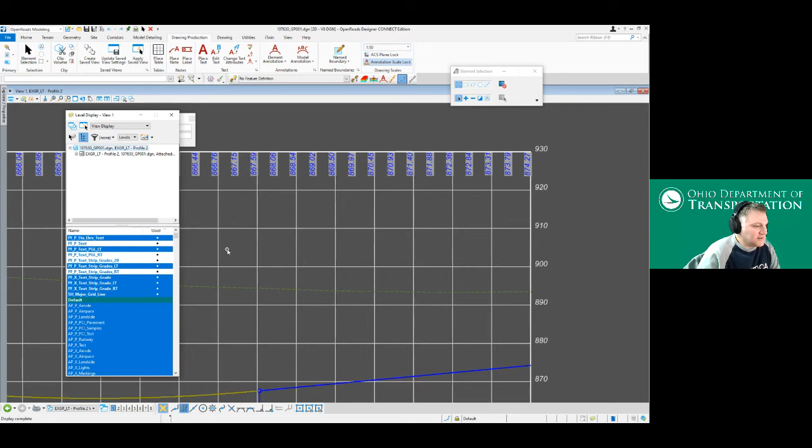So again, I'll just leave on my strip grades left so that I can visually see that the colors match, so I sort of know just by looking at it which is which. I could turn off my PFP text that was for that other alignment, and that profile annotation goes away. The same thing goes for the existing strip grades. So I have some on the right that are displayed on top there. I have some that are on the left, and then I have the existing at the center line.

So when you get into the plan production, the idea here is we'll just swap out the level display you want to see for the particular sheet that you need. So hopefully that's pretty straightforward. I wouldn't mind some feedback on this when you guys get there, or if you attempt to use it. The other thing I had mentioned earlier was that I changed a couple levels.

So the proposed station elevation text is now on a separate level from the other text. I think it was on the same level as this proposed profile text. So we can turn that off or keep that on and turn the other text off individually. So I'll just set this back to the left levels that I wanted. I can save my settings, and then I should be able to go back to my sheet model.

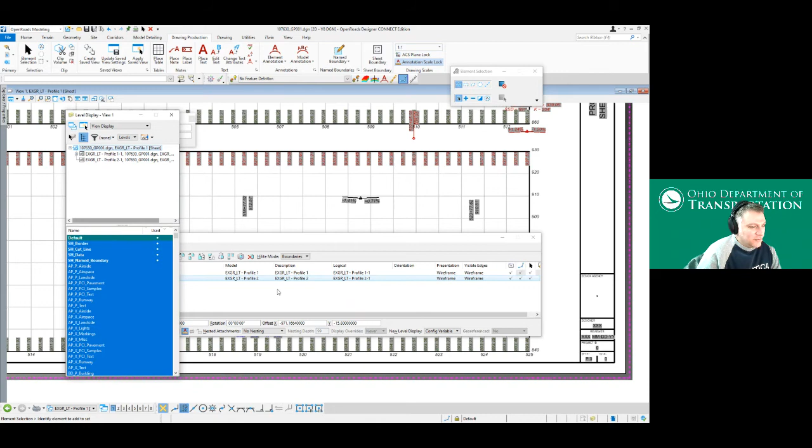Again, we have the level display issue. If you see this, you may need to come in and turn the live nesting off and then control the level display differently here. Hopefully that's addressed. Bentley's hinted the next version has a lot of plan production updates coming, but as JD mentioned, they won't give any indication of when that's coming. So hopefully that will fix a lot of the level display type stuff that we've all been seeing on plan, profile, cross section. So I'll just stop there.

I think I showed what I wanted to show. I can go back. Again, the idea was to use level display to control. Oh, I lost my profile lines again. So the idea is that we're going to use level display, and I've had some issues with other demos that I've done in level display, so it may just be me. Hopefully it's not everyone else. So that's what I have for that.

It's your display overrides on the reference there. Oh, thanks. Yeah, for this reference, it needs to be.

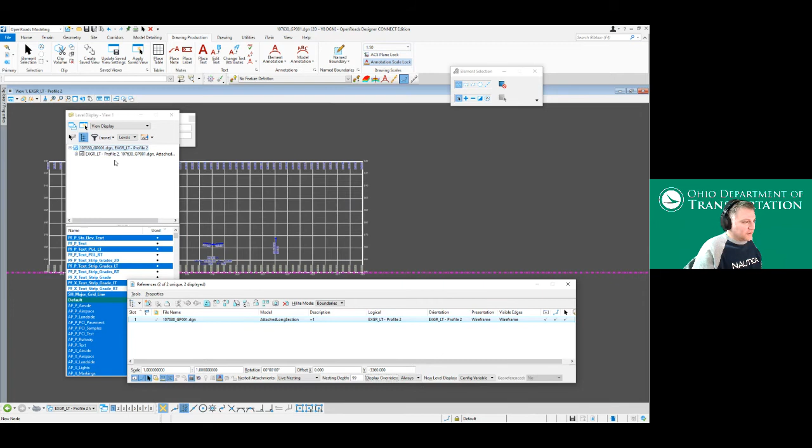Yeah, thanks, JD. I knew I forgot a step. And then as far as the sheet stuff, I think that needs to happen. So those levels were maintained here, but then when we go over to the sheet model, still not maintaining them. So we might have to just set the no nesting there.

Yeah, you just turned it off a second ago when we were talking. Oh, I did. Yeah. So we might need to come in and do... Well, not there. Just on the drawing is only if you don't want to control it from your drawing or your design model. Then go to the drawing model and change the overrides to allow, and then you can control it on the drawing model. Okay, right. Thanks.

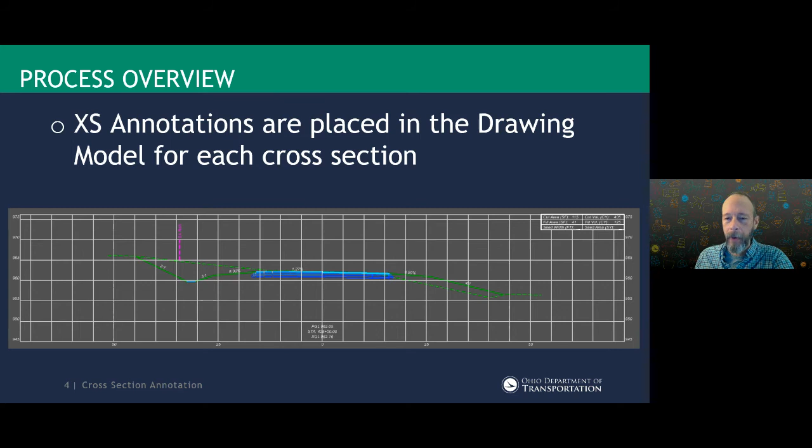So the ODOT annotations tend to be pretty generic and address a lot of scenarios, but it's not going to address everything, and you may have to make some customizations. So just as an overview of the process, the cross-section annotations are placed in the drawing model for each cross-section, and that includes a grid for the cross-section. So there's just an example there of a typical cross-section in the drawing model.

So what can be annotated? Well, I mentioned those. Bentley provides 4 types of annotations, actually. So the grid, linear annotations or segments, point annotations, and the last one is a frame annotation, which we're not using for any of the ODOT stuff, so I'm not going to cover that.

So the annotations are defined in the Ohio DOT feature definitions DGN Lib, and it looks like I've got a problem there on my slide. It's in my dialogues over top of the text, but each annotation is defined as a separate annotation definition, and then those definitions are put together in a group. So looking at the MicroStation Explorer dialog, our OpenRoads standards, and then looking just at the library here. So starting from the bottom up is the individual annotation definitions, and then those definitions are grouped together in an annotation group, and then there's 2 different annotation groups in ODOT standards currently.

That's odd. I wonder why that reset those. I had that. So I'll fix the PowerPoint before we distribute that.

So the annotation group is selected when you're generating the sheets. So this is in the sheet clipping process. When I get to the create drawing dialog, it's going to default to the appropriate annotation group for the sheet scale that you're placing, but that's where that is selected when you initially process.

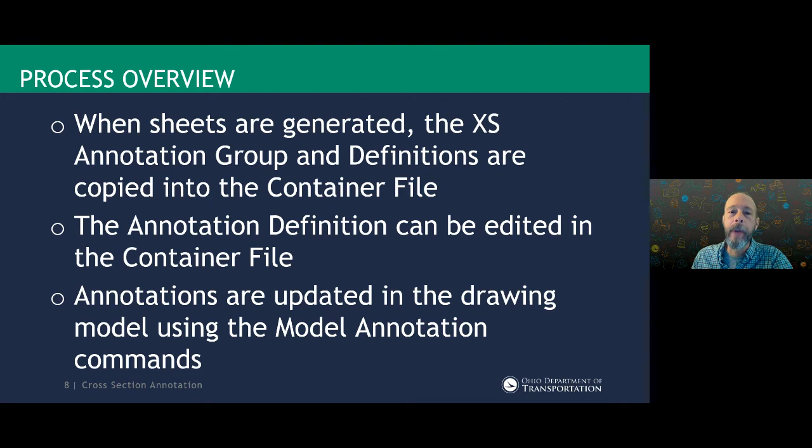So some background stuff that you need. Annotations use 2 different things. They use element templates and they use text favorites. So the element templates are used to define the symbology, and then the text favorites are used to compute values, such as the elevation of a point or the slope of a segment.

So a lot of users have never had to really work directly with element templates or text favorites. So I want to start just giving a little background information here on those items. So what I've got open here is my container file, and I've already clipped some sheets, so that the information has been copied into the container file.

So if I go to the place text command, there's an insert favorite option here, and that's a text favorite. So that list is just the text favorites that are configured in the ODOT workspace. And if I go down to the bottom, I see some cross-section text favorites. So there's text favorites there for end areas and cut volumes and things like that.

Then there's some ones for like our point offset or our point elevation, the slope of a line or the station. So these text favorites have already been configured. If I pick the manage button, that's where I can create new text favorites. So it's going to show me the library and those text favorites that were in that list,

and I can't edit those, but what I can do is in my file, I can create a new favorite and then give it a name. And then over towards the right is where I'm going to define the text style and stuff for that text favorite. So the field type, one of the field types is OpenRoads cross-section fields, and then that sets the subtype to cross-section annotations. So here's just the different types of things that can be annotated, or at least extract values for a text favorite from a cross-section.

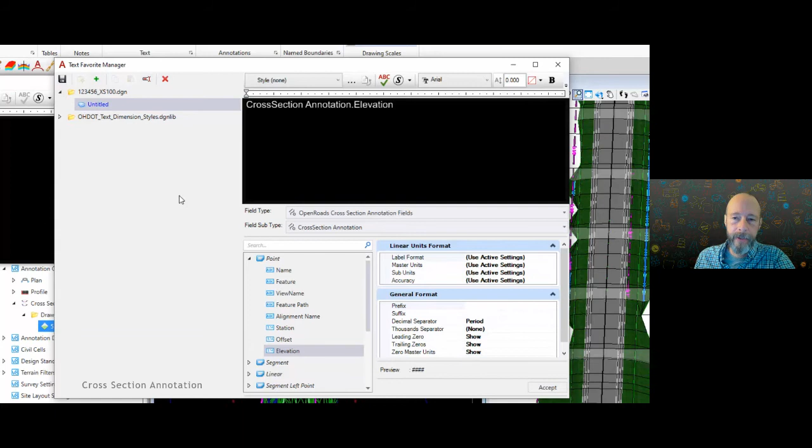So just looking at the point, I can extract any of these pieces of information for the point. Once I've selected that on the right, I can set my number of decimal places and things like that, and then just accept that, and it adds it to that text favorite. So then I can just save that, and that's now a text favorite that's available in this file.

So if there's something that you need added to the standards, that's something that you could just contact ODOT through their support request. So I'm going to go ahead and close this and not save that. So that's just a quick overview of a text favorite and how one is configured. The second thing that's used in our annotation is an element template. So on the attributes group on the home tab is the element templates.

And again, these are all read from ODOT's library. So if I go and manage these, I can see the element templates that are coming from the library or any that might be in the active file. So what I'm going to do is just expand the feature definitions DGNLib, and there's a group for annotations here. And under annotations, there's sheets, and then there's XS for cross sections. So these are element templates for various things that would get labeled in a cross section.

So for example, the XS_text element template is set to the sheet text level, and then by level for the color, style, and weight. It's a primary class element, no transparency, and a priority of 500. So the element templates just define symbology. In my video, I should have clicked on the XS quantity table, because that one is an example of something that places a cell. So it just adds the cell name to that definition for that element template. So that's just a little background on the text favorites and element templates.

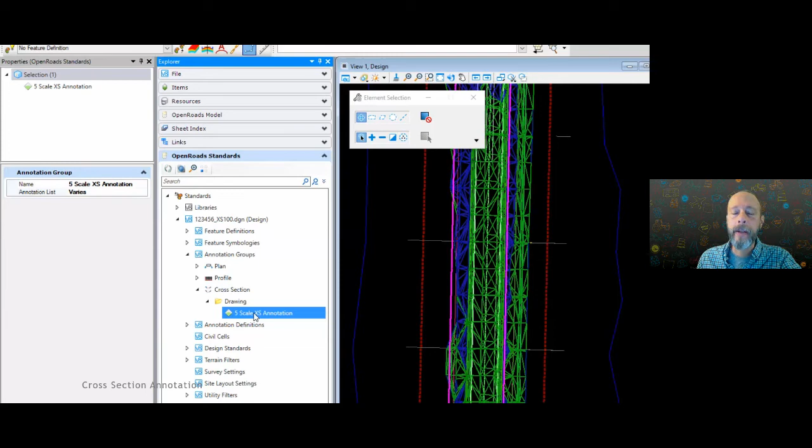All right, so in our active file under annotation groups, there's that 5-scale XS annotation that was copied in, and I can right click on that and pick manage. It also is available in the properties dialog. There's the annotation list, and it says it varies. If I click in there, I get a little button that'll let me manage that. So here's the dialog for managing the annotations.

And on the left is all the different annotation definitions that are in that particular group. And those were created by adding new, and there's those 4 types. And you can also use ones that have already been defined. So if I say add existing, these are individual annotation definitions that are in the ODOT library.

So there's commands across the top there to delete one, copy and paste one, move it up or down in the list, import it from an XML file or export it to an XML file. There's also a button to select the template that you're going to be working with for defining your annotations, and it's going to show that over there in the right. So I'm just going to pick a template out of the template library, and then if I do the fit command here, it's going to display that.

So you've got commands across the top right for the view. You can turn off the display of that template. Sometimes when you're working with the annotations and you click on them, it's a little slower if it has to update the display. So turning that off can be useful. So there's a fit, and it's just showing me that template. There's a window command. It's a little different. These aren't MicroStation commands. I have to drag through it for that to work.

There's fit or zoom commands. The pan left and pan right kind of work different from what I expect. I hit pan left and the section's moving to the right. What I'm viewing is to the right or left, and then up or down, pan up and pan down moves it up or down. So those are a little inconsistent in how they're defined.

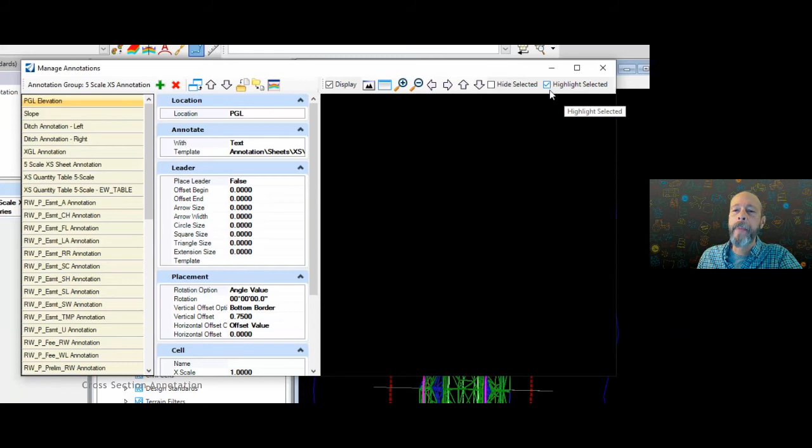Then the last two, there's a hide selected. So whatever I have selected is displayed, and most of the annotations are displayed. It doesn't show a lot of the, well, I'll just leave it at that. So the PGL is placed at the bottom, and I can zoom in or out with the commands or use the mouse wheel. If I highlight, it does refit that, but if I zoom back in, you can see the current annotation definition is highlighted for the PGL.

The value that's shown there is just a placeholder. It's going to be read from the text favorite. It's going to go read the elevation of that PGL point in the cross section. So this is just kind of an overview of the dialog. So from here, we'll kind of go into some of these and talk about how they're configured.

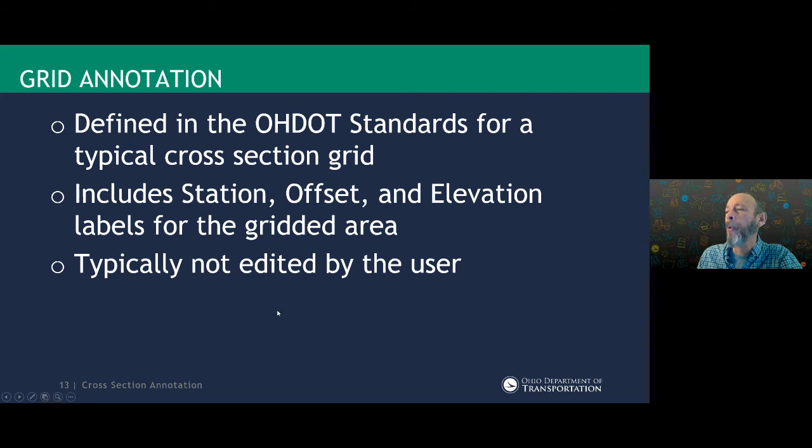So I'm going to start with the grid annotation. And this is defined in our ODOT standards for a typical cross-section grid. The grid includes the station annotation and the offsets across the bottom and elevation labels on the right. And this is something you probably won't need to edit. So here's a little video that talks a bit about the grid.

So this is in that Manage Annotations dialog. And if I'm creating one from scratch, I would use the Add button up here to add that in. And I would select the grid annotation option. So in the ODOT stuff, it's named 5-scale XS sheet annotation, and it matches the name of the annotation group.

So the grid itself has several parameters that can be defined, and I'm going to highlight that so we can see everything that's controlled by the grid. So I mentioned it's the grid lines, it's the station value, and the elevations across the bottom. And if I scroll over to the right, that's the offsets across the bottom and the elevations on the side. And again, the values here are just placeholders.

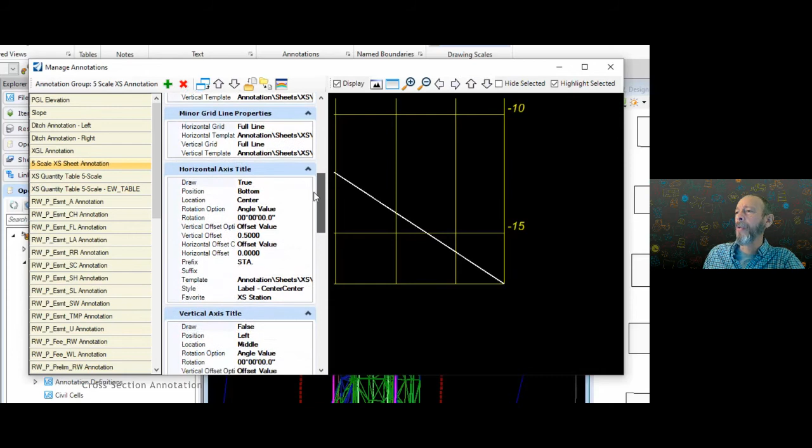It doesn't matter. So I'm not going to go through all the parameters here, but the bottom is turned on, the top's turned on, and then there's a horizontal template. That's a MicroStation element template. So it's using the XS sheet grid element template for that. And if I come down and look at a couple of these, going down to the horizontal axis title, that's the one that's going to control the station label.

So you can see in that horizontal axis title group, it's set to draw is true and the angle is 0. And there it's using the text favorite of the XS station for that annotation. So that's how that's defined. It's using a center justification for that, and it's using that XS text element template to control the level, style, and weight of that. So that's all I really want to talk about with the grid. Like I said, you probably will not need to edit the grid.

So let's move on and talk about our point annotations. So point annotations are defined by either a point name or by a feature definition. And points can be annotated with either text or a cell. And the text annotations use those text favorites to compute the values, such as a station, offset, elevation, point name, or feature.

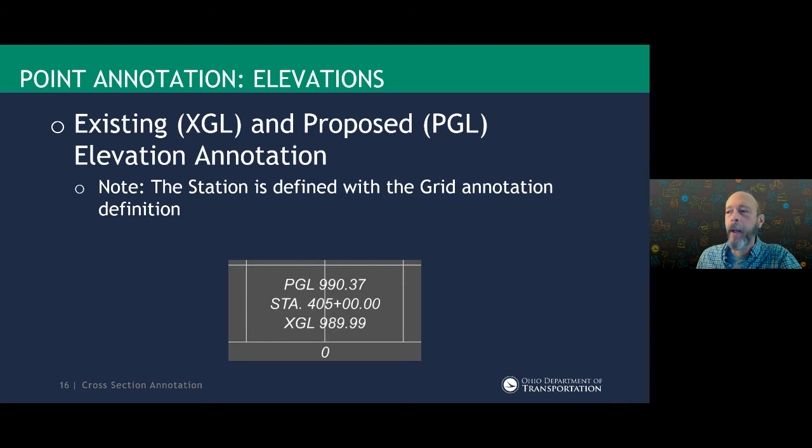So this is just zoomed in on the bottom again, the XGL and PGL elevation annotations. And as I said, the station is annotated with the grid. So we've run into a couple of user support issues with this, so I want to talk about this a little bit.

The PGL elevation does require a point named PGL in the template. So it's going to find that point at my cross section. Actually, it's a 3D line string generated from that point, and it's going to annotate it using the XS point elevation annotation. So we had a consultant working on a project where the project was just shoulders and side slopes. They didn't actually have a PGL, so they didn't have a PGL point in their cross section, so they weren't getting that annotated. But the PGL point also triggers the earthwork table, and they weren't getting an earthwork table.

So I'm going to talk about that a little more in another slide. So that's something to be aware of, is that PGL point does trigger the earthwork table, that placement of that cell, and there's another option for that.

The XGL annotation does require a point named XGL in the template. So again, that's just a null point in the ODOT templates, and we've had some people delete that, and then they don't get the existing elevations. And that's why you need to have that point in your template in order to get those existing elevations.

So again, my text got reset somehow behind my dialogues. I'll fix that in the PowerPoint for distribution.

But that XGL and PGL annotation does have to have a feature definition defined. So we did have a support request where the user had the PGL and XGL in the template, but the feature definition was set to none, and it wasn't picking that up. So it does need to have the feature definition. And this is the point properties dialog in the template creation is where this is. So make sure you've got the feature definition assigned for that.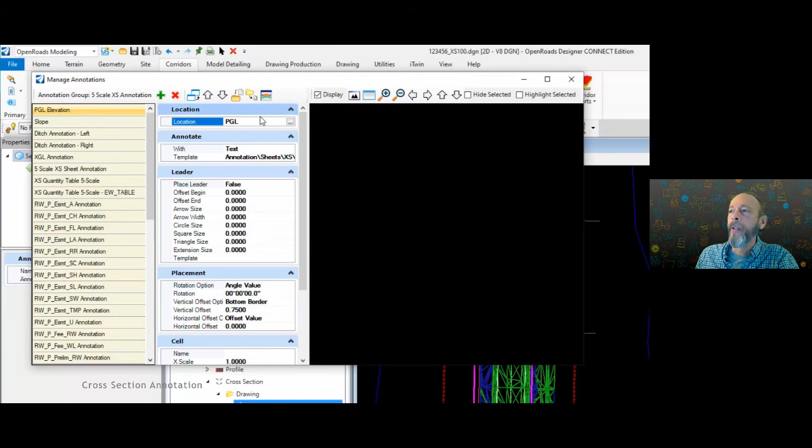So if I put my focus in that field, there's a box I can click on that's going to open the dialog where I can manage this annotation filter. So when I'm working with points, I can tell it, hey, let's just use all the points in the template, the cross-section intersections, or I can just filter this by a list of points. And that's what the PGL and XGL are defined as, just a list of points. So that's at the very bottom.

And I can use that select points from template to choose my template, and it's going to show me the template, and anything that's annotated there on the right, and then a list of all the points on the left. They're highlighting those in white. If I remove it from the list, you can see it's just shown as red.

So I'll do a fit on this, and I can click on the points, and it will add those to the list. So you can see I picked on a point for the left tie, and multiple points were highlighted. And that's because in the template definition, those have a feature name override assigned of left tie. And in the point list, those are shown in red. So anything that has a feature name override will have red text in the point list.

So I'm going to remove that one, and let's go back and just put the PGL back in here. And then I'll just close this dialog. So that's how that's defined. There are some different expressions that can be used. In this particular one, we're not using any. I am going to talk about those a little bit in another video.

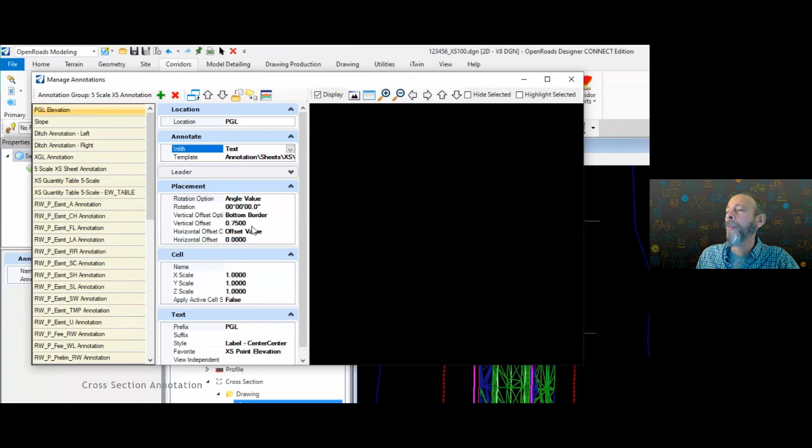So once I have my point defined that I'm annotating, I can annotate it with either text or a cell, and then I'm going to choose the template that is going to be used for that. So this one's annotated with text. We're not placing a leader line, so I just turn that off, close that up. The PGL is going to be placed 0.75 units from the bottom border. So that's what controls the vertical location of that.

So I turned on highlight, and we can see it in yellow. The horizontal location is going to be controlled by the location of the point itself, wherever the cross section intersects that point. So in this case, my PGL was right at the center line. So it's right at the 0 offset.

Okay, we're not placing a cell, so I'm going to collapse that. There's where that prefix is defined for a PGL space. And there's my style, the label center style, and it's using that XS point elevation text favorite to compute the elevation value. So that's an example of annotating a single point. Let's go ahead and move on to our next slide.

So ditch elevations are also another single point annotation. And I want to mention this: in the template library a while back, Matt and JD made some changes to the names of the points, and they're now using L-ditch inside and R-ditch inside for that inside point on the ditches. Some of the older templates used just L-ditch and R-ditch. And the annotation definition has been updated with these new names.

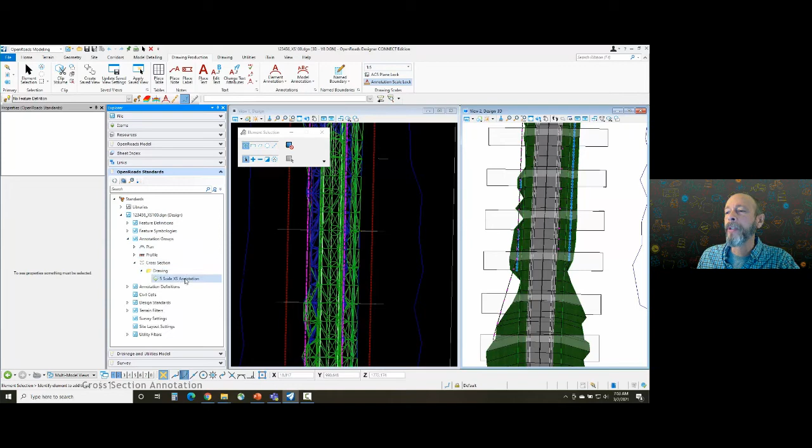So what I want to do is go back to my container file and make an edit to my annotation definition to include that point name. So here's the container file, and I'm going to browse through the standards of the local file, annotation groups, cross-section drawing, and there's my annotation group. We'll right-click to manage that. So this is going to be my ditch annotation right, and you can see the location. It says on top. Let's take a look at that.

So I'm using a list of points, and I am using an expression of on top and a point named R-ditch. So I can select that from the templates. And again, this is an older annotation definition. It didn't have the R-ditch-inside. So I'm just going to pick that from the list and add it to the points that will be annotated, and just apply that expression change and close the dialog. Not going to make any other changes. Just go ahead and close that out and go back to my cross section.

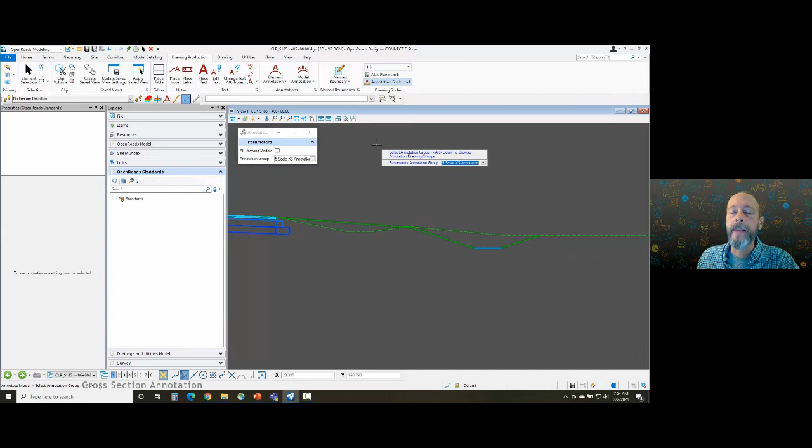In my cross section model, I'm in the OpenRoads Modeling tab, Drawing Production, and I'm going to remove the model annotations. I could do this for all the models or just this model, and then I'm going to re-annotate that. And then you'll see I'll have my ditch annotation for that right ditch inside point when this re-annotates.

So it's justified by the top left, and that's going to be directly below that ditch inside. And I can see the offset, and it might be something I want to tighten up a bit. If I want to tighten up that offset, I can just go back to my annotation definition and change that vertical offset value. Okay, so I think that's about everything in this video.

So let's move forward. I mentioned the earthwork table. The PGL point is what triggers that earthwork table placement. And I mentioned a project where they did not have a PGL and they weren't getting the earthwork table. So what we did is add it to the annotation group, and if it finds a point named EW_table, it'll place this cell in the template.

The location of the point really doesn't matter. It's just, is it there? Yes. It places the table in the upper right. So it's using the border top and the border right for the placement of that cell. So that's something to be aware of with an earthwork table. You can just add a null point named EW_table, and it will trigger the placement of that.

Right of way: there have been various seminars where we've talked about right of way, so I'm not going to go too deep in this, but the right of way annotations use the feature definition. So what I've got here is just an example of one of them. The expression is using a conditional expression. It's looking at all the points, and it says if the point feature definition equals this right of way proposed aerial easement, then it's going to annotate that, and then those annotation definitions are set up with a cell.

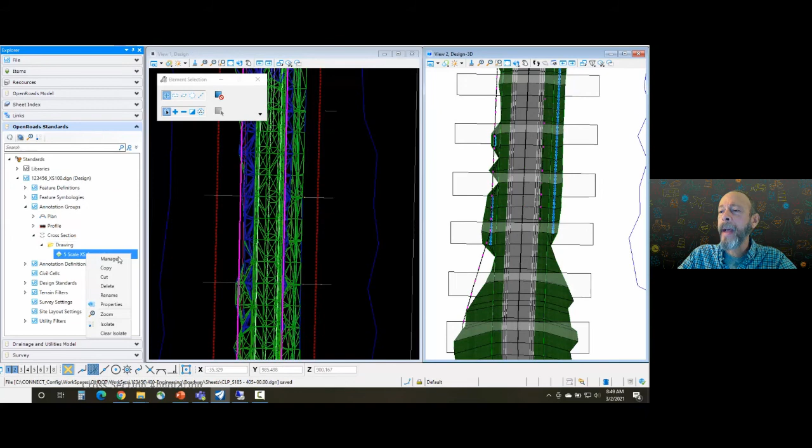That's actually a known problem in the 10.9 release. It sometimes misses a segment, so that's been logged with Bentley. And I'll talk about the shoulders here in a minute. Then I can see on the left side, I did get an annotation on the back slope, but I didn't have an annotation on the back slope on the right. So what I want to do is look at my annotation group, and let's go manage that and take a look at the slope definition.

So it's in the ODOT stuff, it just is slope, and that was added originally as a linear annotation, and then parameters were set for that. And I'll look at the location values for this. So we're looking at all the segments, and it could also be defined to create a list of segments, and I'll show you that in the last video I've got. And it is using some expressions here.

So there's 3 expressions. So it's saying, hey, Point 1 on top and Point 2 on top. So those are generic. They're not using point names. And that's just coming from this list. It says click or drag to add an expression. So you just click on Point 1 on top, and then I think you have to double click actually. And then that and logical operator, and then Point 2 on top is how that is built. So that's the first condition, Point 1 and Point 2 on top, and it's not less than 2.9 feet.

So why 2.9 feet? So the idea behind that was on a shoulder in the ODOT template library, the shoulders have an intermediate point in the middle that's used for the break on super elevation. And that shoulder break is typically 2 feet or 2.5 feet, depending on your shoulder width. So the idea was not to annotate that shoulder as 2 separate segments, and it doesn't get annotated at all on a 4-foot shoulder. So 2.9 was used. If it's greater than that, then it's going to.

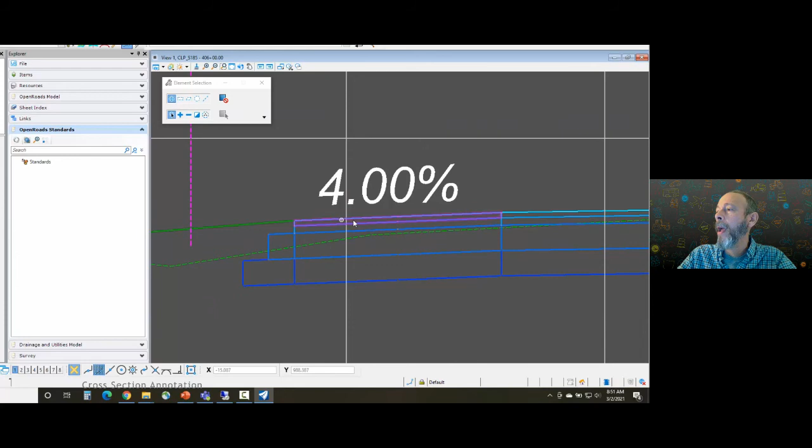Another option would be to, if you don't have super elevation, go back to your template, delete that point out of the template, and you'd have to reconstrain your outside shoulder point, and then reprocess your model, and then you won't have that point in the middle. So I've got the same thing on the other side.

And here you can see I now have that back slope annotated that was missing before, and that's because the segment length was less than 2.9, and that's why that wasn't annotated before. So just some things to look out for on the slope annotation, and why you may not get some pieces, and some edits you can make there to adjust that.

Now you can create your own annotation group, and this allows you to control exactly what's annotated, and this will be created in the container file. And you can reuse some ODOT annotation definitions that are already available. So here's a video that's going to talk about creating a custom annotation group.

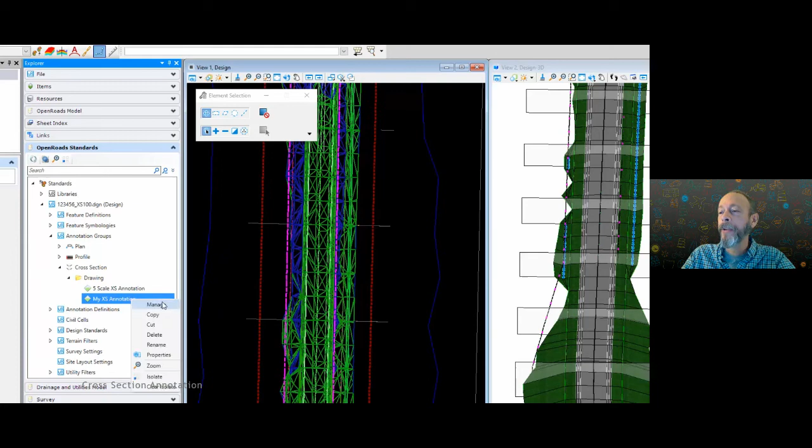So I've already processed the sections, and that annotation group has been copied into the active file. So one thing I could do is copy the ODOT one and edit it, or I could create a new one and just give it a name. So we'll name this my XS annotation, and we'll manage the new one. So I've got no definitions at all included.

So I can add new definitions, or I can use some out of the ODOT library. To do that, I'll just expand this, and there's all the available annotation definitions that are in the ODOT library. So I'm going to annotate the PGL, so I'll just use that. I'm going to annotate the XGL.

I probably bring in the grid next. So there's that XS scale, 5-scale XS sheet annotation. That's our gridded area. And I bring in a couple more. I'm trying to remember what I do. Oh, if I want that earthwork table, I can bring in quantity table, or the quantity table using the EW_table point. So I can bring one of those in if I want that. Click on it.

And I'm also showing here that if you have right-of-way, you don't need to include all of these. You could just go select only the ones that are applicable to your particular project. So you don't need to have all of those right-of-way items. So I'm going to go ahead and add a new linear annotation here. So I can define my slope annotation for the segments that I want to be annotated. So I'll just give it a name. I called it linear slopes.

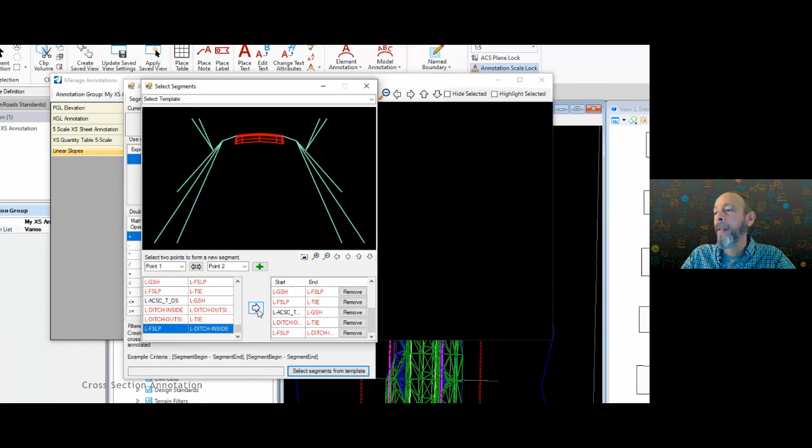Again, I'm actually running in 2020 release 3. So it's a 10.9 version. I'm running that version for all these videos and using the current ODOT standards. So earlier when we talked about compatibility with standards, if you're ahead of ODOT, that's okay. If you're behind, then you'll probably run into problems.

Okay, for the slopes, I'm going to annotate it with text, and I'm going to pick an element template for that. So the element template is going to control the level, color, style, and weight of that text. So we'll use just that XS text element template. I'm not going to place any dimension lines with that.

For my placement of the slope, I don't want an absolute angle. I want it to be tangent to the element that it's annotating. And I'm not going to set a vertical offset. I'm going to use a text style. I'm not placing a cell, so I'll collapse that.

I'm going to use a text style that has built into it a bit of an offset. So there's this label center descender. That's something that's new in Connect as a justification, center descender. And that gives it an offset built into it, so I don't need to set an offset value.

So for the slopes, we're going to use a text favorite of our XS slope. And again, these are coming from the ODOT library or any that you have defined in your container file. And we're not going to do any view rotation. So I'm going to go ahead and close this and go back and annotate my cross section.

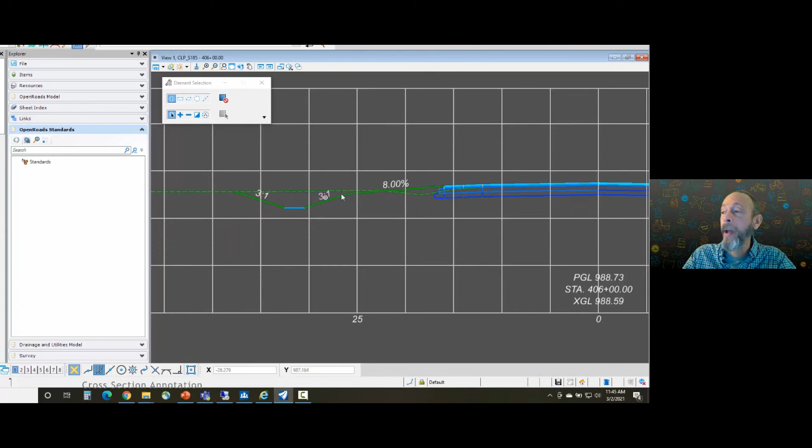So I'm back on my cross section. I'm going to remove my annotations and we'll go ahead and annotate this. And you're going to see when I was picking my segments, I did not pick any pavement or shoulder segments. So I'm annotating using my XS annotation. I didn't include a ditch, so I don't have ditches. But you see, I didn't include pavement or shoulders, so I don't have those annotations.

And like I said, historically, we wouldn't annotate pavement slopes anyway. So that may be desirable, and then you don't have to worry about cleaning up any of those shoulder annotations. So that's the process to create your own group, to pick the segments that you want to annotate. And I know some users like to do it that way and just create their own.

So a couple of known issues. 2020 release 2 update 8: I ran into removing model annotations and re-annotating doesn't always function. Sometimes it generates an exception log and doesn't complete the task. So I've run into that and we've logged it. It was confirmed by Bentley.

As I said, I'm running 2020 release 3 update 9, and you can see I was removing and re-annotating with no problems. So that's apparently been resolved with release 3. And then in release 3, occasionally some of the segments don't get annotated. We've seen that, and we've had a couple reports of that from a couple consultants, and that's been logged with Bentley. So a couple things to be aware of. So that's everything I've got to cover here.

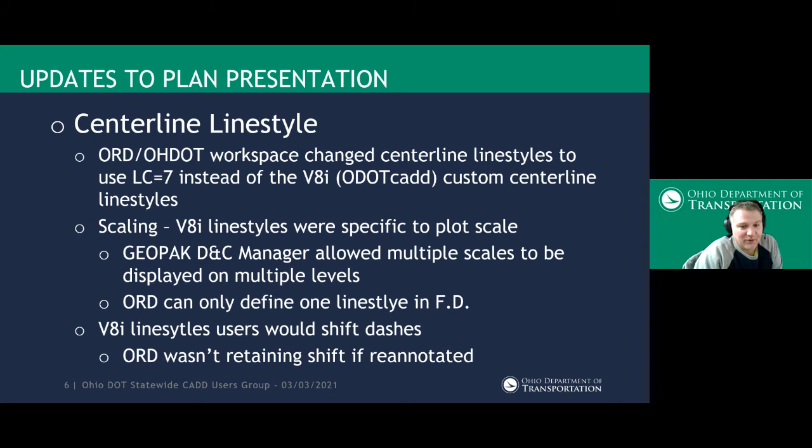Also, with the V8i line styles, users would tend to shift the dashes so that you could line up the dash with the station tick, and that line style shift wasn't being retained with ORD if the sheet or the model was re-annotated. And then also with that centerline line style 7, our pen table didn't handle that very well. So if you've plotted anything, you probably noticed that it doesn't appear very clean.

All right, so I'll stop here, and I will post a link in the announcements window. You should see a link to the forms, and I will drag that over so we can take a look. So when we look at this form, again, we just gather who's responding, and if we need to contact you later, the email address makes things a lot easier.

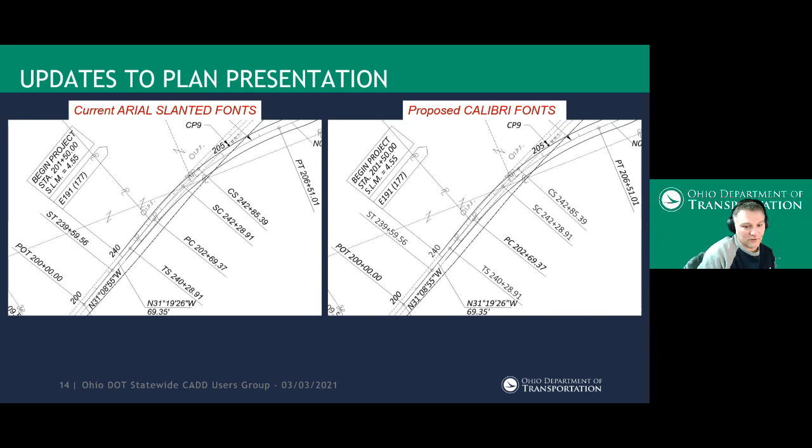So that said, I'm going to post the last poll that we have related to the font changes. So if you don't mind opening that up, and again, same thing, we just like your contact information in case we want to reach out to you. Do you agree with this proposed font change from Arial to Calibri? Yes, you either like it, no, you hate it.

And if you don't like it or have a better idea, please give us a description of what you feel like is something we should consider. And then do you have another TrueType font that you'd like us to consider as well? And I think that was it. Oh, there's a couple other questions at the bottom. I was just curious to see if we were to make a change, would you apply this to current projects, or would you only go with new projects, which would be our recommendation? And I think question 9 sort of repeats itself, but if you don't mind, take a look at that.

And what I'm going to do now, I hope the live feed has caught up, and I will bring over the poll responses for the plotting. Okay, so we've got 45 responses here. Do you currently use the OHDOT UT pen table to plot color utilities? A lot of yeses there, actually more than I expected. And a couple people didn't know it was there, sort of suspected that would happen as well.